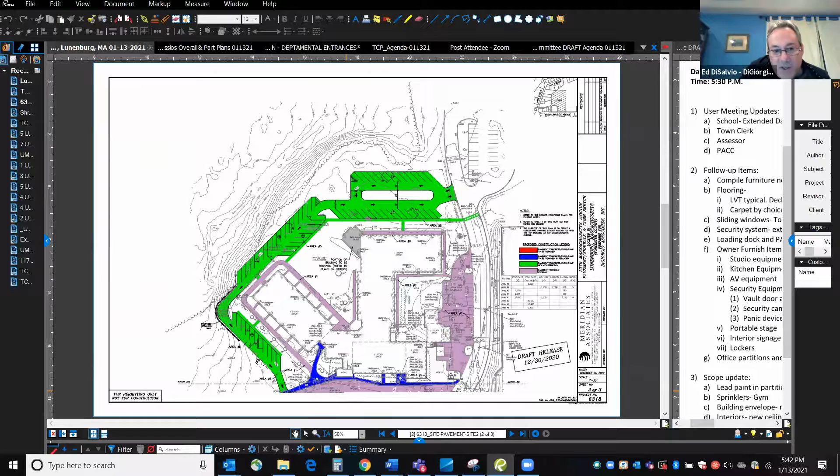So what's different from the previous version is that for the west wing, previously we were going to remove all that sidewalk because it was intended to remove all those existing exterior doors. Thompson had some additional meetings with the user groups and they'd like to keep those exterior doors as a second means of egress. So we've kept those walkways, and the purple color indicates we're doing a bit of pavement overlay over those existing walkways, as well as all the other walkways that are to remain. We're also doing an overlay on the east parking lot, which was brought up at the last meeting as well. We took a second look at the pavement in that east parking area and agree that it should be overlaid with a fresh course of pavement. So those are the major revisions.

The new parking is the same, the parking count's the same, none of that has changed. We've just updated the overlay areas. So that's on the civil site side. I don't know if there's any questions on that.

Yeah, okay, we'll take questions. I'll just go right down through, I'll start with Brian. Thank you. I like the sidewalk on the northeast for access for the kids from the middle and high school, I think that makes sense for that walkway. I did have a question. Did you consider kids coming from the middle and high school going to the Boys and Girls Club towards that southwest? I feel like they'd follow that crosswalk, continue west, and then would they get onto that purple, follow that down to the bottom? I didn't know if this should be a consideration for a crosswalk in that southwest corner. I just want to make sure that we don't have kids crossing traffic trying to get to the Boys and Girls Club down the street.

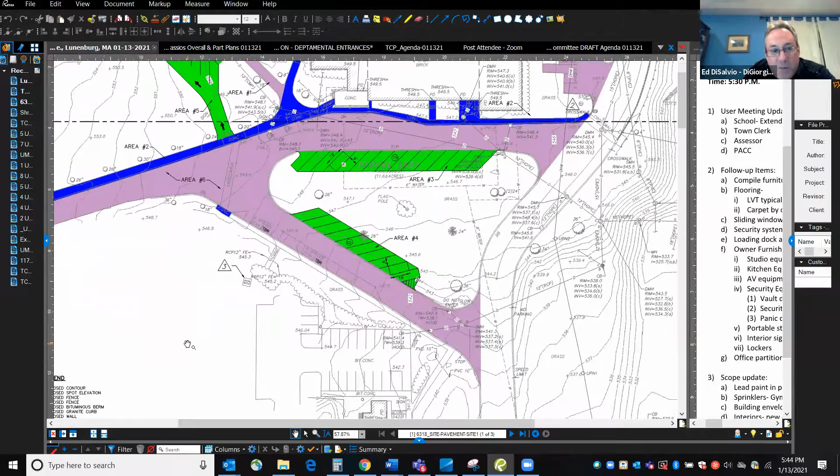I think it's the next drawing. Maybe, it went up. Yeah, right there. So there's a crosswalk at the end of the green where it intersects with the blue sidewalk and the purple pavement in the road. You can see there is a crosswalk there. It's kind of screened, but there's a crosswalk to go from the patios, right where Tom's showing it, to the side. Is that what you were referring to that you'd like to see?

So I'm referring to that area. I don't know if there should be a crosswalk going across the green, in that entryway to get into the parking lot, to go across that sidewalk. Does there need to be a crosswalk there? Yeah, going horizontally?

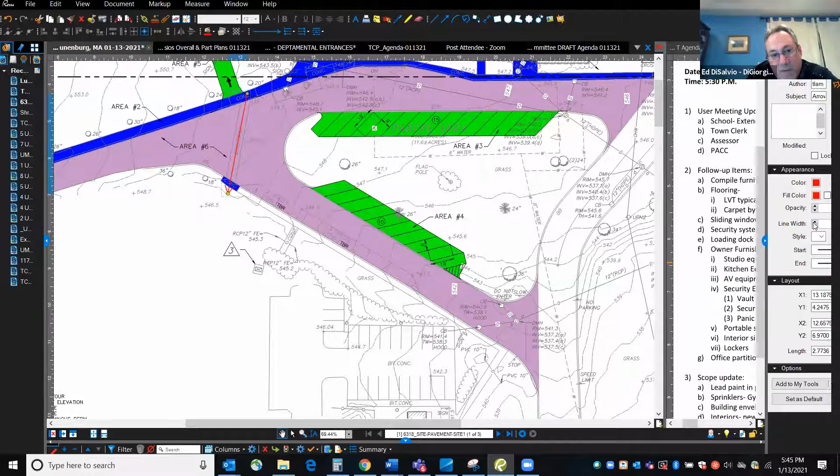Yeah, it's there because of the parking that's on that side. There's a walkway as you work your way back up towards that intersection. So then there's a crosswalk to either go to the TCP building, or when you're leaving it, to get to the parking that's around that island.

Is there another one? I think what he's talking about is across the end of the entrance to the road that heads around the west wing, because the kids will be walking up that new blue sidewalk towards the teen center. So off the north end of that existing crosswalk across the driveway, to the left in the picture.

Okay, maybe Tom, you can sketch that in so we can all see it. So we're saying around here, it's going to be across Area 5, the green of Area 5, where you have the blue that intersects the green. But if you go down lower, you have the sidewalk. If you go down towards the main turnaround, you have a sidewalk there. So there needs to be a crosswalk.

Bring it down more, bring it down more. Right there in that blue. In the blue, going across. So it should go like this. No, you had it right the first time. Horizontally, so it's parallel with the sidewalk. It just crosses the driveway. That's correct. Okay, we can definitely add that.

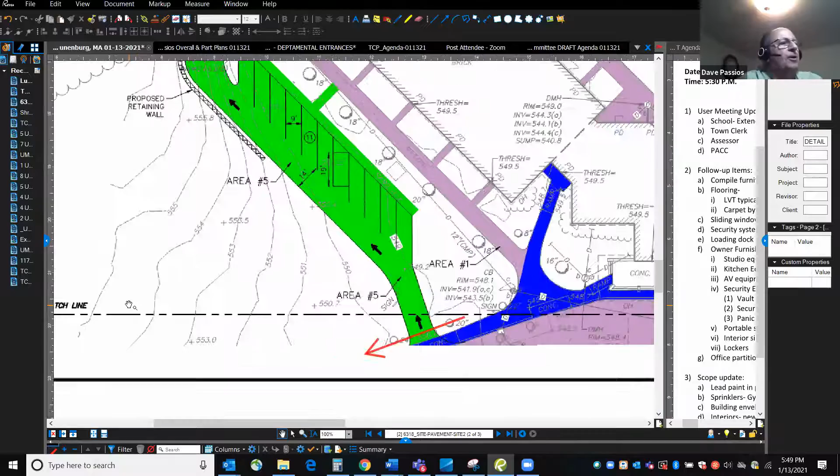Because there'll need to be a don't-disturb area -- that may be the wrong terminology. It's more conservation, but beyond that green area, there's going to be an area that's going to be dedicated to grading, and no impact on that wall, so on and so forth. Let me see if I can get that right.

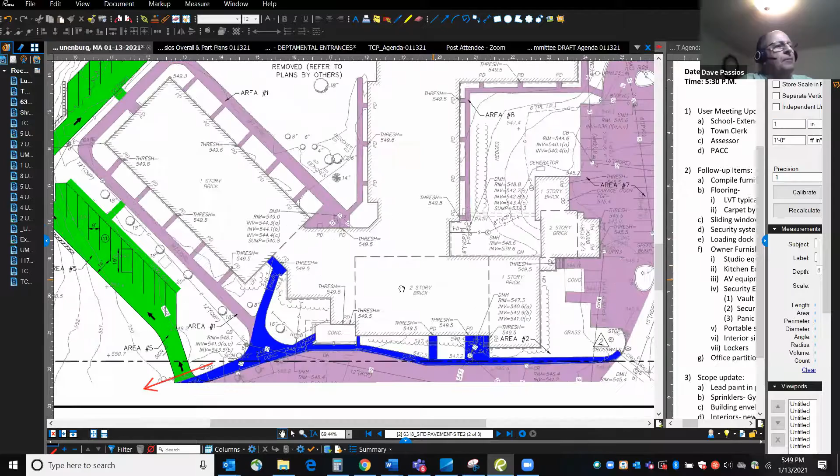I think he's driving at a limit of work there. We can establish a limit of work along that -- yeah, that's the terminology. Yeah, you're right. Okay, I mean, probably need to overlay grading on that, Ed, and see how that comes out. Anything else, Dave? Nope, I'll have them determine that and get back to you on it. We'll have them online, yeah. Okay, appreciate it.

Matt Allison. Yeah, the only thing I can think of that stands out to me is, I'm wondering -- you've got existing sidewalks, and then you're going to build a new sidewalk in front of the parking. Aside from the existing trees, which I'm not even sure the condition of, is there a reason not to bring the nose of the parking stalls right up to the existing walk, instead of building a second one?

That's a good question. Bring the brand new parking up closer to the trees? Well, basically what I'm talking about would eliminate those trees.

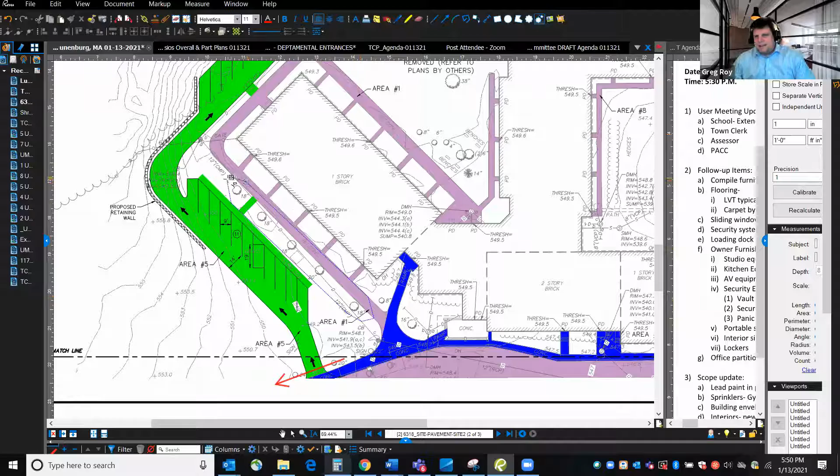I'm not sure what condition they're in. I think they've been there since I was in first grade. I think that's what the concern was, the trees. I looked at those the other day when I was walking by there. I think it's varied, Matt. There's a couple that are in pretty good shape still, and at least one that took a beating in one of the storms, an ice storm or something.

The other thing is I think it's laid out the way it is now because we had expressed in a previous meeting that we liked that strip of green space and the trees left in place. So I would disagree with extending the parking lot to that walkway, but that's just my personal feeling.

What about the other way around? If we're going to have to redo the walkway anyhow, just make the walkway next to the parking.

I'm still, my question is going to be on the doors, but I'll wait for my turn. I don't see a purpose that we have that many doors, that's an expensive thing to have all those doors for egress, you know?

Well, hang on one second. Let's just make sure Matt's done. I know, Matt, so I did, would you look at it, yeah.

Maybe moving the walkway to the other side of the trees. All right, hang on, bear with us. Well, I guess we're talking about that. I don't know if we want to take that up now or if we want to.

Does it make sense to talk about the doors and then we can back into the walkway? Sure, so I can have Matt explain. Did you have any other, that topic needs more discussion, but did you have anything else, Matt, that you wanted to ask?

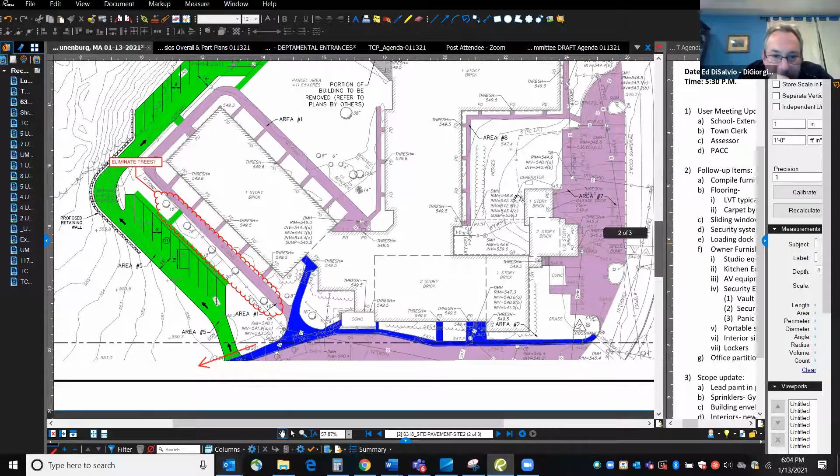So if there's no handicap spaces over there and you're not using it as an accessible route from a handicap space, I don't know that you would need a sidewalk technically. Customarily you do provide it, it's nice to have folks not have to walk across the grass to get to the building. You provide a courtesy walkway, so when you get out of your car you could walk across the head-in parking and then take the little green path over to the purple overlay to work your way to one of the building entrances.

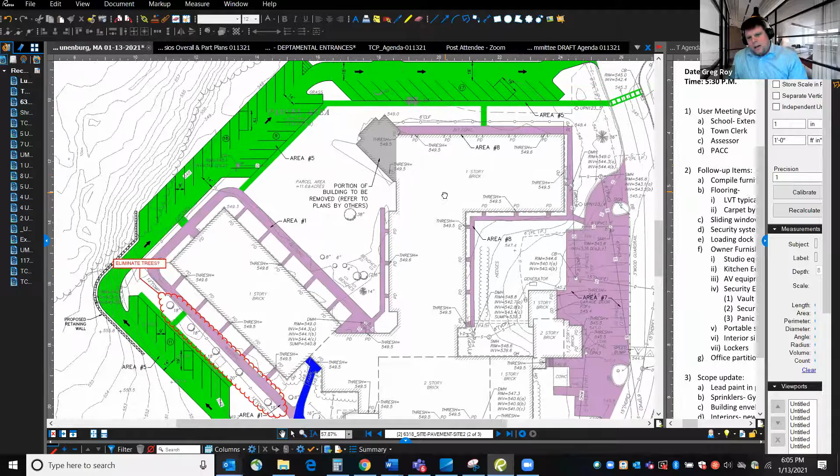It's a little different in this situation, like if you were to pan up to show the parking on the northerly side there. It's different when the parking is on the opposite side of the building, because people will walk naturally towards the building, so they're not going to naturally walk towards the sidewalk anyway. That's probably why they didn't show a sidewalk along that portion - no one's going to naturally walk that way. But when you have parking up against the building, typically it's included.

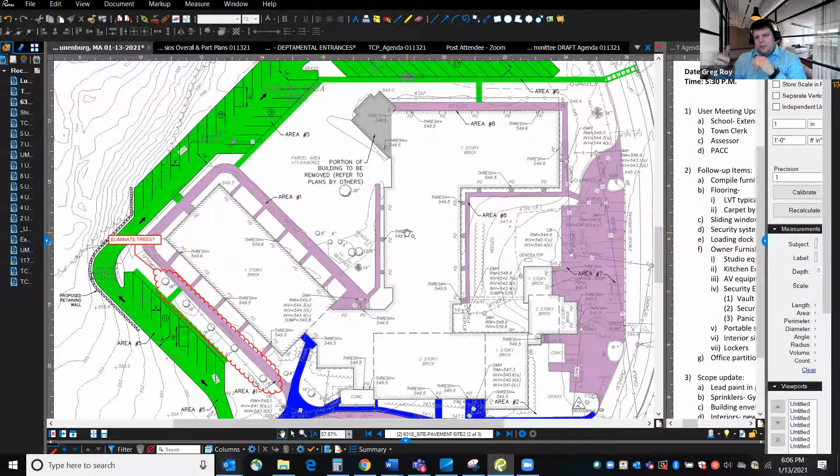So I guess I'm in favor of having it up adjacent. I just think that we need to eliminate the existing sidewalk longitudinally. We might need connections to the doors, but we'd want to eliminate the rest.

I get the feel that Ed really needs some direction on that. Otherwise, we're going to delay the final layout of this. Can we work this out amongst us tonight?

I honestly, if the committee agrees that we should take the trees out and move the parking lot closer, I'll get on board with that. My preference would be to eliminate the existing sidewalk parallel to the building and just extend narrower walkways, or whatever's required for ADA evacuation through those doors, to be able to get to the parking lot.

I think if we're going to keep the doors in the offices, then it makes more sense, in my opinion, to just bring the walkway right up to the building and then push the parking right up to it. So you have the doors, then a sidewalk right there, and then the parking lot. That saves us some maintenance area, and as Matt Allison mentioned, provides some expansion potential down the line.

I tend to agree with that. I think it also might save a little cost, because if you slide that closer to the building by 10 feet, you're going to be out of that slope where the road takes a 90-degree turn around the building. You'll minimize it—you're still gonna probably need a wall, but it might be smaller.

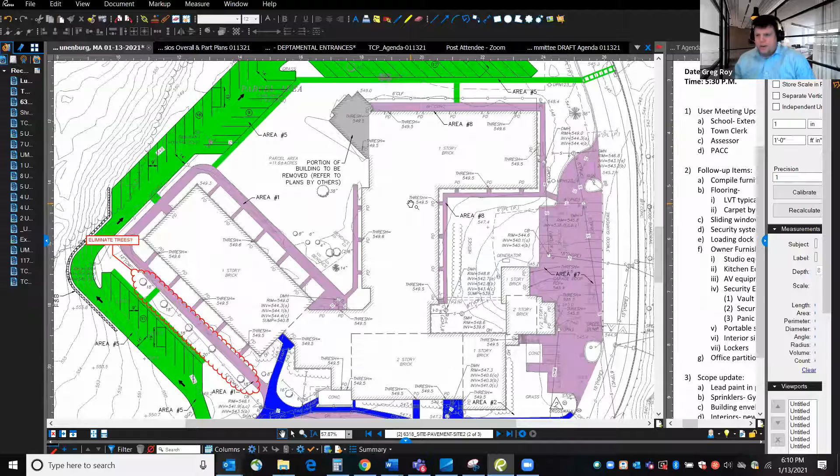Quick discussion—the other side of it is this sidewalk on the other side of the building, the administrative side. We talked about the side where we have all these doors and the sidewalk here. Can we pull that sidewalk against the building? If we're going to have doors there, why don't we just make it right against the building? That way we're eliminating all these little extra doodads and the higher maintenance. So I'd look at all of the sidewalk to be a walkway right against the building, as it is in the north section, area 8, where we have the sidewalk right against the building.

That turns into a reconstruction though, rather than just an overlay. I thought there's a cost associated with that. I thought they were going to make it concrete, but they were ripping it up anyhow. I think it's just an overlay, purple over the existing. All right, that's fine, it's like an inch and a half. If it's cost prohibitive, that's fine, I'm just trying to keep maintenance down.

I still don't understand the reason for all that sidewalk and all those doors, but I'm gonna keep my mouth shut. All right, well, we're certainly not censoring you, Dave. I felt that was the way to say it politically.

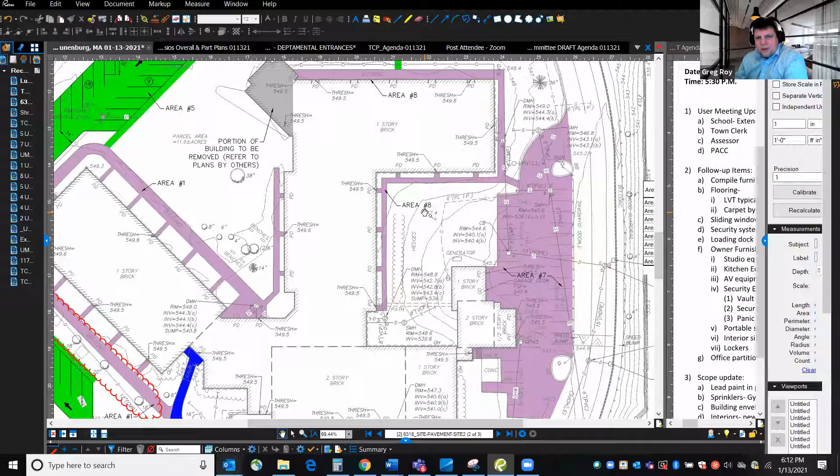Well, not against the building, but just to be clear, Dave Passios, basically we'd be keeping the sidewalk in the existing location and taking out the trees and moving the parking up against that location, correct? Right, which would eliminate the requirement for a new walkway to be constructed on the edge of the parking lot. Oh, okay, move the green up to the purple. Clear enough, gotcha.

With that, I will take a roll call vote. Brian Leighton, yes. Michael Ray, I want to ask another question.

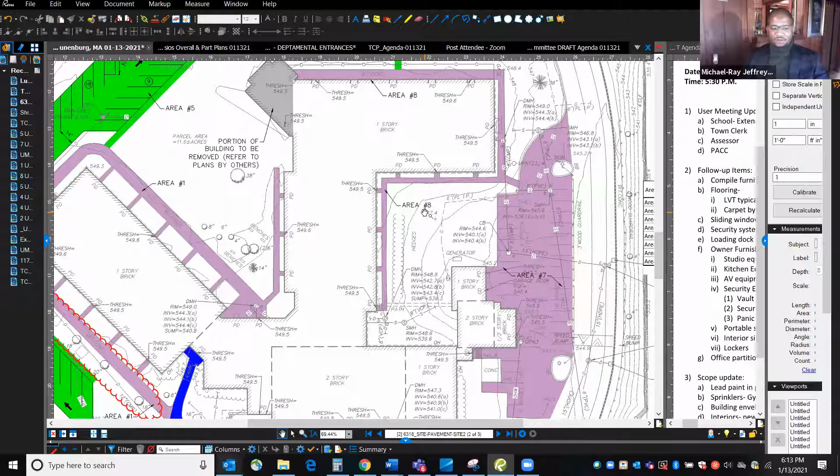I'm sorry, okay go ahead. So just so I'm clear, Mr. Passios, your motion is saying keeping these side entrance individual walkways that lead up to the main sidewalk, is that correct? And as Mr. Ray just mentioned, all you're motioning is to move the green to the purple, but you're not changing any of the purple, is that fair? Yes, that's correct. And if you're concerned about the connection from the door to the existing sidewalk, that's going to be required anyway if we've got emergency egress.

Okay, I'm a no. Dave Passios, yes. Matthew Allison, sure, yes, sorry. David Blatt, yes. Okay, yes for me. So we're 5-1.

Okay, does that give you what you need, Ed? Yes, thank you. Can I ask a question though, Mr. Chair? Yep. Michael Ray, was there a reason, is the reasoning more based on the fact of all the egresses and those walkways? Yes, okay.

I agree with you, but I didn't think that was part of our discussion there. No, I think it would just be more effective. On the north side of the building we're not really going to see that, but on the south side, this is the visible part of the building from the roadway. To me, it's a lot of sidewalks that go to nowhere, that are never going to really be used. It would be cleaner to, even though we keep everything else the same, just change this portion and eliminate those individual walkways, push the whole sidewalk up to the building, and push the parking lot up to the sidewalk. What that does though, Michael, is it brings all of your pedestrian traffic, which is coming from this parking lot, right outside the windows of all those offices along that entire wing.

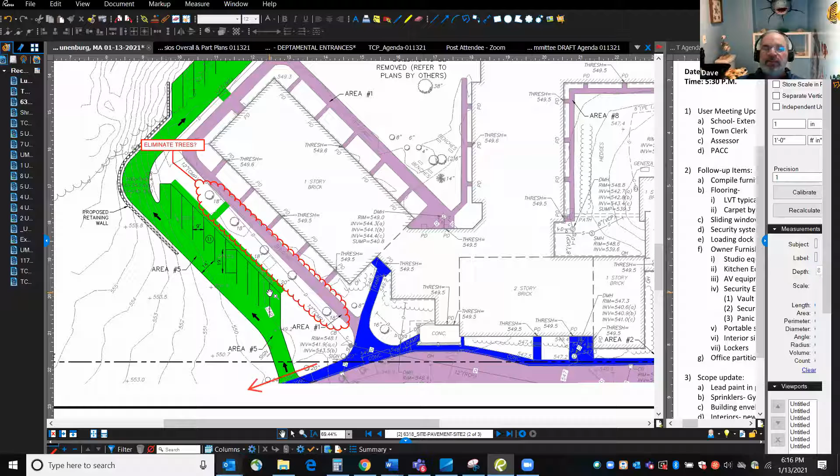Take the doors out? Well, even if you had the doors, could I do something else there? Could I have some kind of material that would look better, or not make it look like a walkway on each one? I don't want to make it so that anybody thinks they can go into the building that way, that's what I'm trying to get away from. Why don't we talk to the civil engineer, as Greg said a few minutes earlier, we might be able to do a pad instead of making a pathway. Perfect, let us know. We could always do an email vote or something like that if you needed us.

All right, Tom, why don't you circle back with the civil engineer, then get in touch with me and we'll see if there's something we need to do. Okay.

All right, so we'll move on. Ed, I don't know if you still had more to go. Yeah, just another quick update to the committee.

We have started the construction cost estimate. The different design disciplines have been providing drawings, sketches, and design narratives to our cost estimator. Tom and I had a couple of specialty meetings today with our design team and the cost estimator on the building envelope and the HVAC. So we're working hard on that cost estimate, pulling all the pieces together. It's a work in progress right now.

One of the questions I have that plays into the cost estimate - we're also doing the soft cost side in addition to the hard cost side, so you have the full picture. And one of the questions pertains to escalation.

We typically do the cost estimating based on today's dollars, but escalate that price to the midpoint of construction. So we were wondering if the committee has a general idea, knowing you're going to town meeting in spring, assuming it gets approved, when you think the design phase would start. From there, we can build a design schedule and a construction schedule to figure out that midpoint of construction date, because we've got to add that escalation cost to the construction cost to give you a good number.

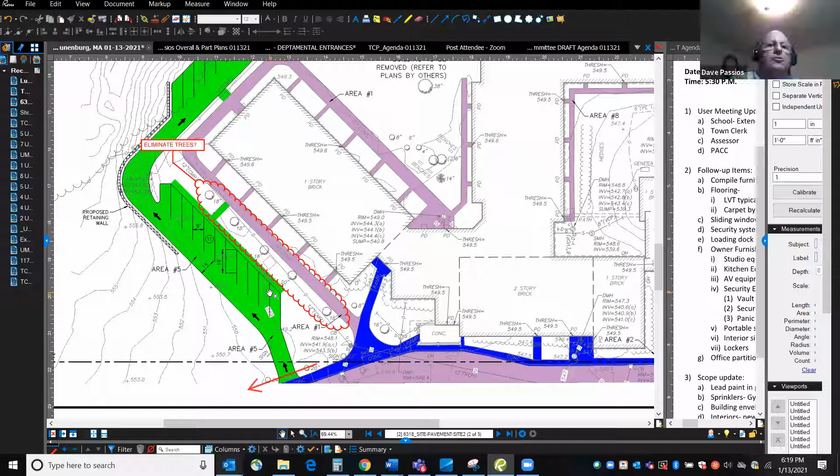I guess I would think it would be pretty quick after receiving authorization from town meeting, but I'm backing off on that a little bit. I'm not sure - Greg, assuming we're going to need to go through the election process, the ballot process also, that's another two weeks. And then that funding is available after July 1st, no earlier.

Right, good point. And then, I don't want to be sensitive here, but I think we'd have to rebid this, correct? Technically, or no? Heather, do you have any input on that?

Can you ask the entire question again? So if it was approved at town meeting - approved at town meeting to build the project - that cost would include bid document preparation, soft costs. How does that work? As far as putting it out to bid, do we have to put that out to bid again, or how does that work for the design preparation services for the bid docs?

No, I think we could do a continuation of the current contract. Okay, so obviously that's ideal because we got to confirm here - I'm not trying to be difficult, I just wasn't sure. So assuming that was the case, I would think we'd be starting pretty fast, as soon as we could negotiate a contract. July of this year - it doesn't have to be perfect. If you said August, we'd be starting design, as a start that's fine.

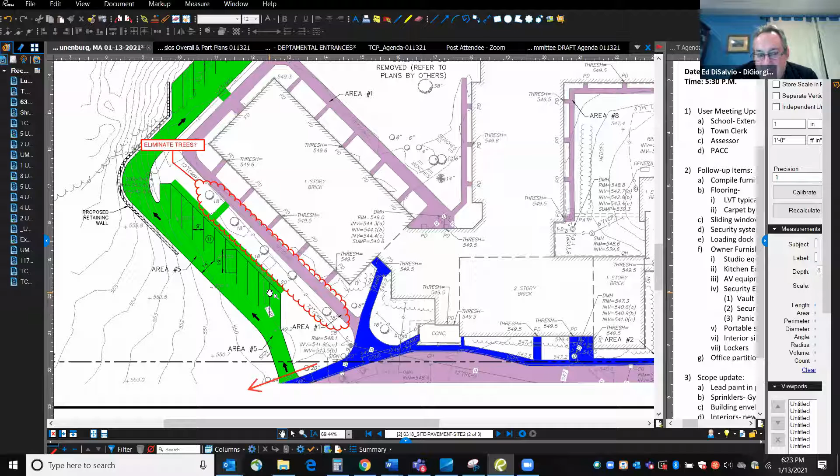Tom asked about the escalation. Based on a design start of August 1st, will it be reasonable to say the midpoint of construction is somewhere mid-year 2022 for calculation purposes? I think construction will be 12 months all in for the duration. We've got maybe 4 months for the bid documents and design, then bidding will be 6 weeks - 4 weeks to file sub bids, then 2 weeks to open the GC bids. Then maybe a month for the town to negotiate the contract with the contractor, so there's some time in there we need to build in. I think we can figure that out, Tom.

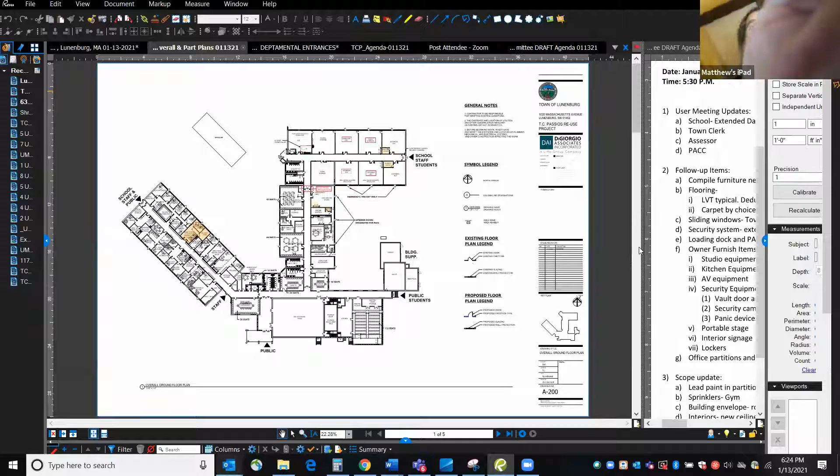I just want to quickly go over the status of some of the user group meetings, and then there's a list of items I'd like to discuss with the committee, which does include the loading dock issue.

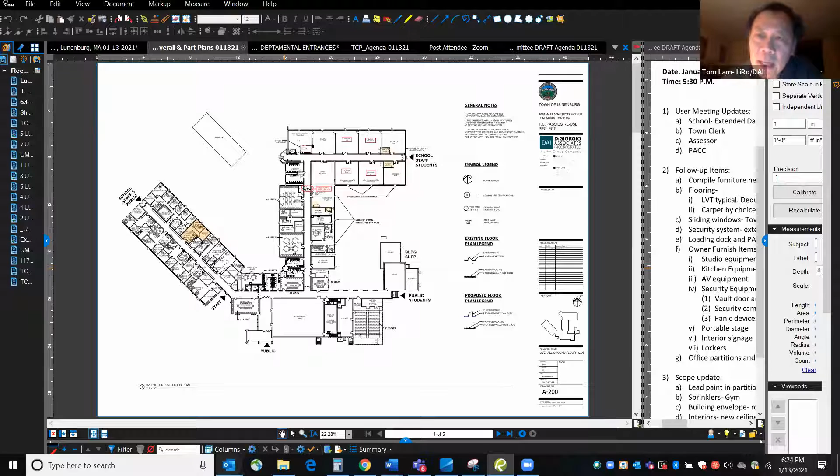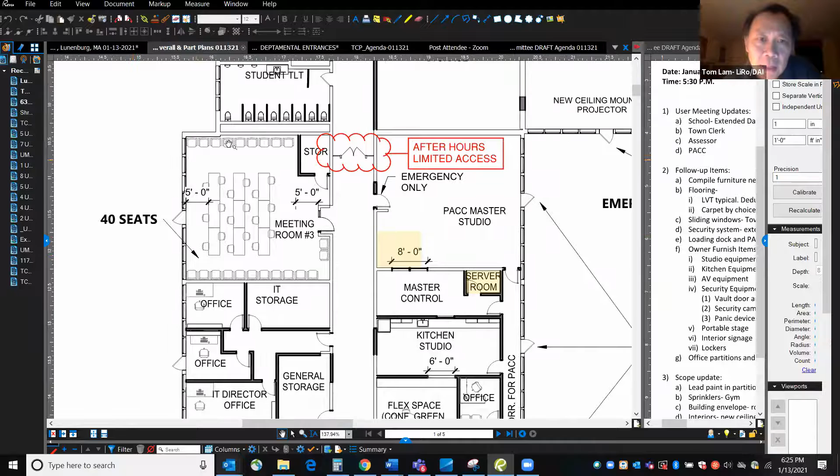Since our last meeting, we've met with the school again because we didn't talk about the extended day area. We eventually met with the town clerk. We're still trying to get hold of the assessor, so we haven't had any feedback from them yet. Steve and Joe have been very kind and gave us several rounds of feedback, so I'll quickly go over some of the very minor changes with the last few groups.

From the school standpoint, the fine tuning is: last time we showed a couple of offices in the ACE area, but since they're more general purpose offices, it would be better to move the director's and nurse's office closer to the door where students come in. For the ACE program, they also want to add some sort of kitchen with a stove, so we need to talk to our engineer about that. We want to define this kitchen and washer-dryer area, so we're going to change the floor coloring to make it look different.

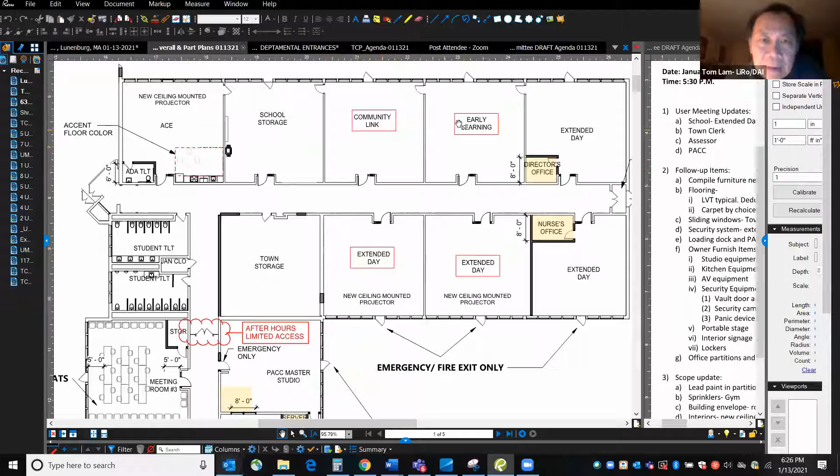The other two changes are really to swap the location of the extended day with Community Link. Community Link and early learning used to be on this side, but they felt it's better to be on the other side. Cost-wise, it's not going to make any difference.

Regarding the PACC area, Steve felt it's not necessary to have another interview studio, so we're making the master studio bigger. We are creating a server room here that used to be another function.

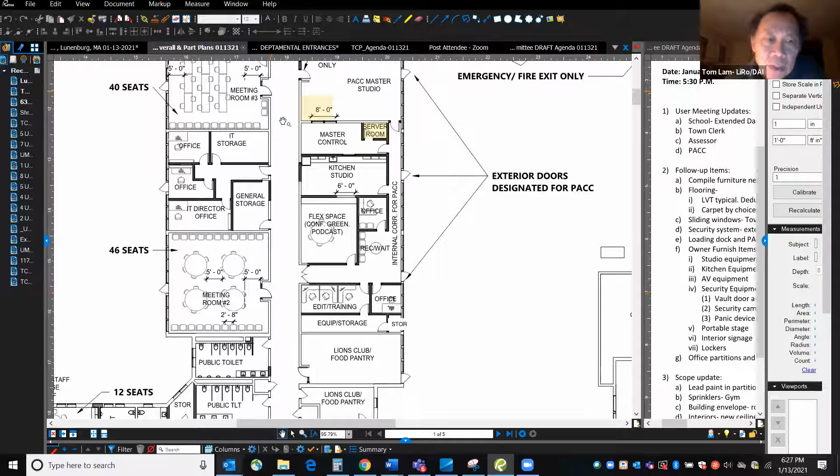One of the things Steve brought up was that the PACC area would be open after hours, so he wants to make sure there's security - that people coming from the PACC suite, when they need to go to the bathroom, won't have access to the conference rooms or other parts of the building. That's why we put in after-hours limited access.

Another issue that was brought up, which Steve mentioned earlier, is that there's some very expensive equipment that needs to be stored or transferred into the building, so there's the whole discussion of the loading dock. I wonder if this is an appropriate time to bring up the loading dock issue.

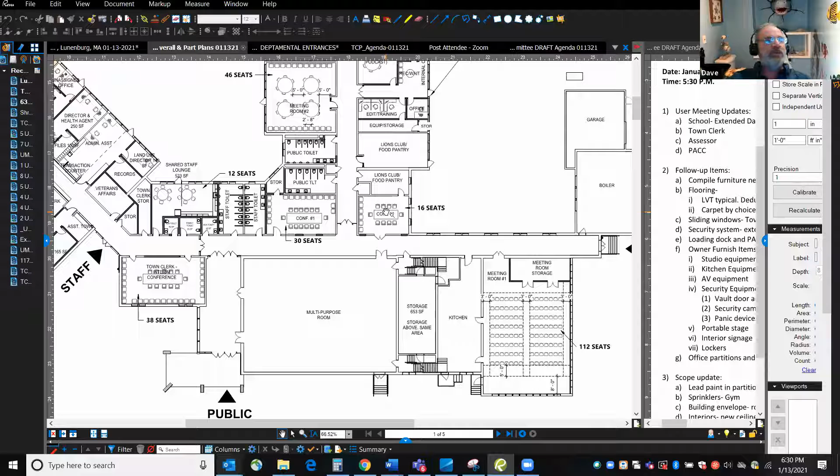Mr. Chair, that was actually one of my concerns too, because if you close off that corridor, there are no public bathrooms left if you're using the multi-purpose room. I see what you're saying. So I'd rather see the family toilet moved to one of the ADA toilets, and the ADA toilets, being next to each other, could be staff bathrooms as well.

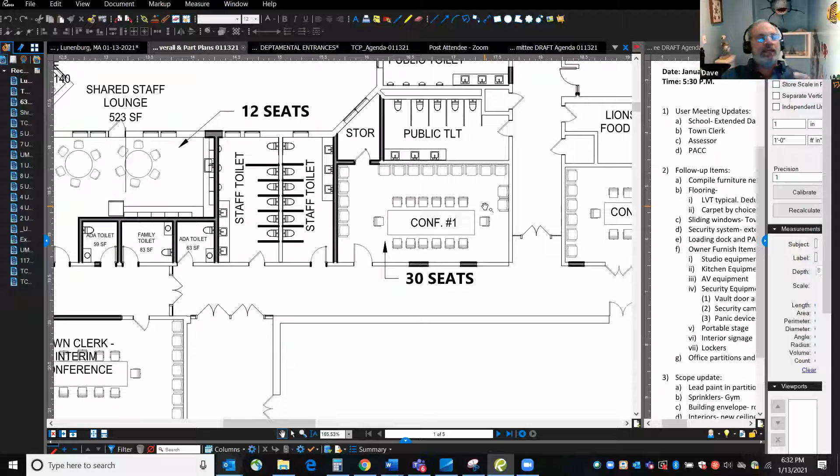So Tom, my biggest thing is I don't want to—you have the PACC, you have all these things down that corridor. So if I'm having an event at the multi-purpose room, or if somebody's using the gym, do I want them going down that corridor, or would I rather they go to the staff toilets? But if they're labeled staff toilets, it's kind of saying you can't use this if you're public.

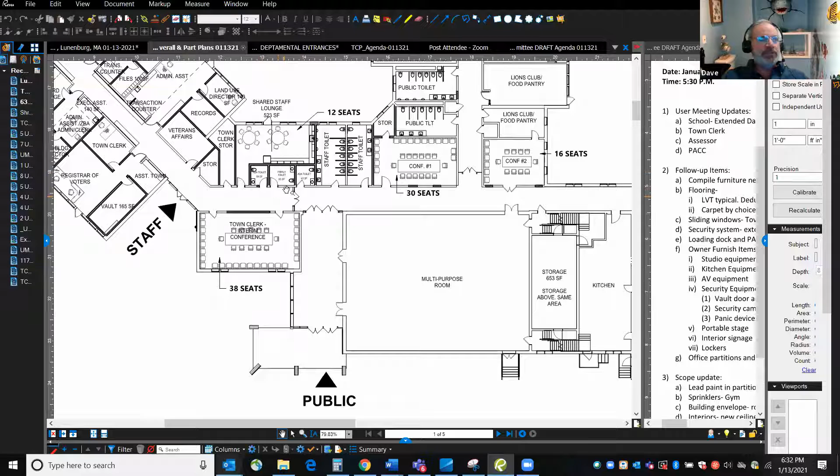So that's why I'd like to see, and this is just my opinion, that you take the right ADA toilet and the family toilet and switch those. This way the family toilet is still a family or handicap toilet, and then you have two toilets there that could be ADA or staff toilets if they didn't want to go to the main toilet. Because I can't see staff needing more—right now staff has one toilet for the whole building, pretty much. Well, I should say two toilets, one in each building.

So what if that's an easy change between family and ADA? What if we say the two ADA toilets are staff toilets, and we just say this is public? During the day, the staff will probably use the two toilets in this area. Right, exactly. And if they're occupied, they can risk going in and being with the public, if it's occupied—which hopefully there won't be too much. During the day, to your point, Dave, that's probably pretty low risk, right? Exactly. So that was the thing, I'm trying to make this so the building could be secure at night, depending on the events going on.

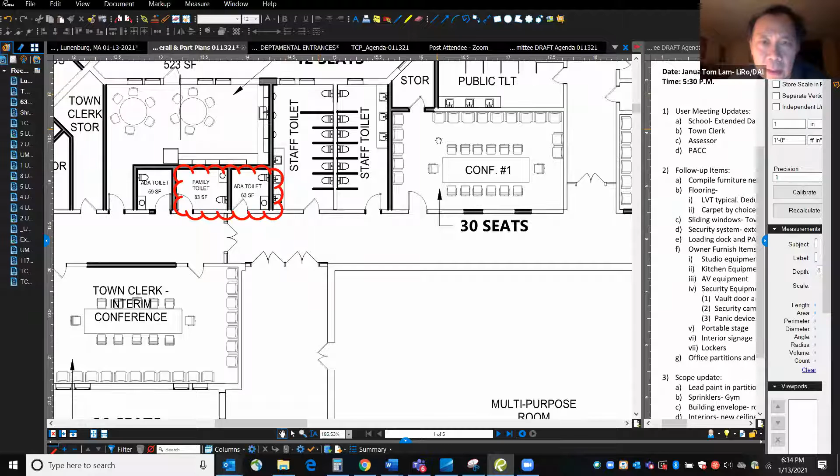Anybody else have any comment one way or the other on that? Tom, based on the way the partitions are set up, are those two toilets farthest in that room accessible toilets? Is that why that partition spacing is different? Yeah, so all these

Group toilets are accessible. Okay, we were just trying to add some more individual unisex toilets, that's all, because actually we didn't have enough, our counts didn't quite work. So that's one of the reasons why we added some, and then there was a request for a family toilet. So could you, even if they're labeled ADA, I don't know if you have to label it ADA, but if the two toilets are sitting there and then you have the family toilet there, that one, I guess would that solve it, or does it have to be labeled ADA?

Oh, it's more general information. Perfect, okay perfect. Yep, and I think there would be, when it's time to put a sign for this room, there'll be a wheelchair symbol or something, because it is accessible. All the toilets are accessible. Right. Okay. Okay, Matthew. Yes, excuse me.

I know I've missed a few meetings and I've fallen a little behind, but I don't understand why, first of all, I don't see why you have to have two separate ADA toilets, and I don't understand why you can't have an ADA toilet in the men's room and the women's room. And the third thing is, why are we labeling these bathroom facilities? Why isn't it just men and women? I don't understand why you have to separate staff from public.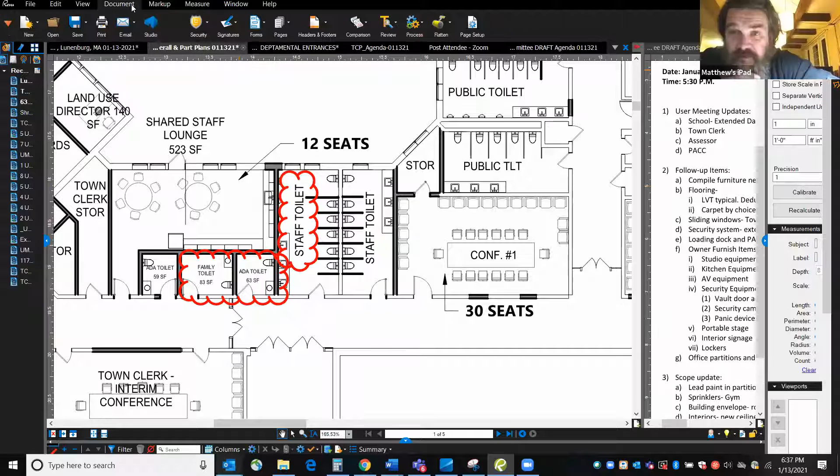So they asked that there be a toilet, that they have a facility that's separate from the public facility. Okay, so they're going from one toilet to twelve toilets. So that's why my suggestion is flipping the two toilets and giving them, okay, you have two toilets for staff, and that's it, you're done, I guess. Well, go ahead, I'm sorry.

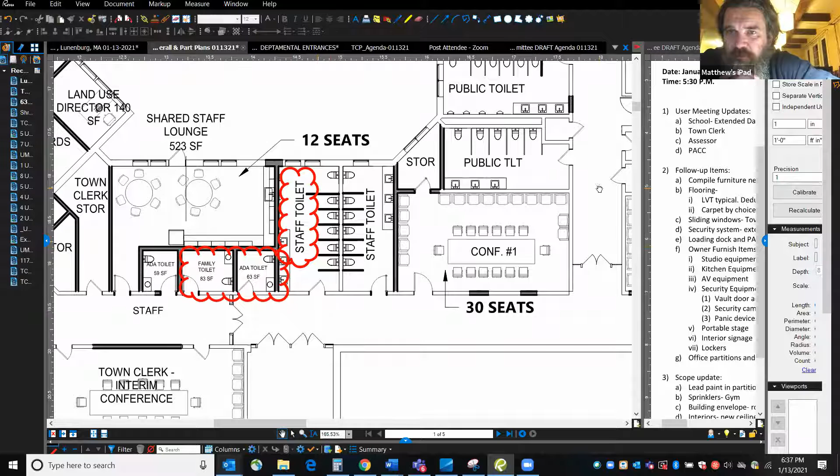No, go ahead. So the follow-up to that comment was, what about if there's a big function in the evening in the cafeteria? Is there going to be any place for those people to use the bathroom? So it would be, if it's labeled staff, possibly they would have to go down the hall and you'd have to have that hallway open. If it's not labeled staff, they can go right there.

Well, in all honesty, I don't care what the label says. If I gotta go, I'm gonna use it. That's right, exactly. Everybody on this call is going to feel the same way, right?

So I guess my biggest point here is that there's a big function facility at the end of the corridor. I guess it doesn't make a whole lot of difference how far you have to walk, but it doesn't seem like you're going to need to draw somebody a map to get there from the cafeteria.

I think I would rather support that the two smaller bathrooms be labeled staff bathrooms, and that large bathroom that's labeled staff now, just make it a public bathroom. Just label it men, ladies, gentlemen, however you're going to label them. Same as the set in the central hallway, or the hallway headed back towards PACC. Both of those areas be labeled the same.

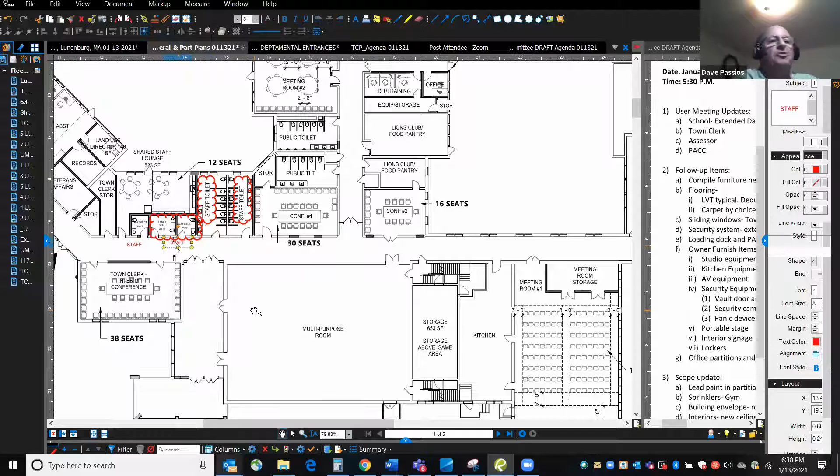To address Matthew's last point about location, I think that's where they are now, so they're trying to just not reinvent the wheel with the plumbing. Do you have any comment on that, Tom? Is that exactly it? We want to reuse, even though all the fixtures would be new, but we want to keep.

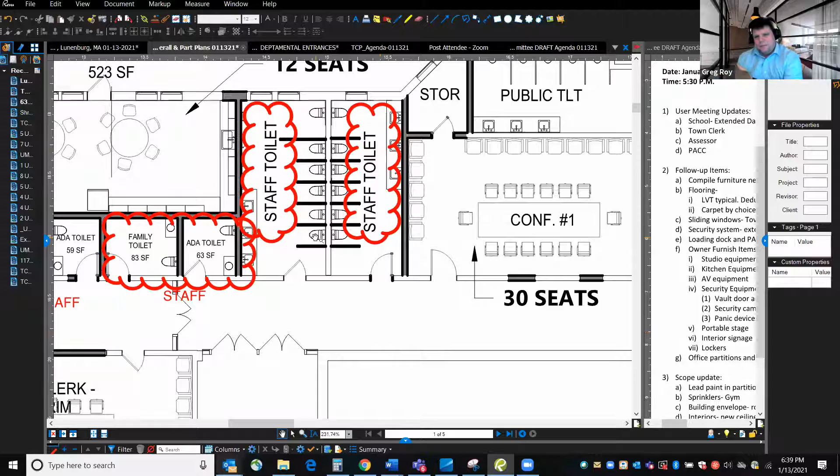Yeah, but do you have any insight as to, I mean obviously if we're building a new building it might be different, but in terms of length of travel, how does that, having to walk from the big meeting room in the cafeteria, meeting room 1, out the door, down the hall, how does that length compare in the realm of projects you've worked on, say? Is this a long distance?

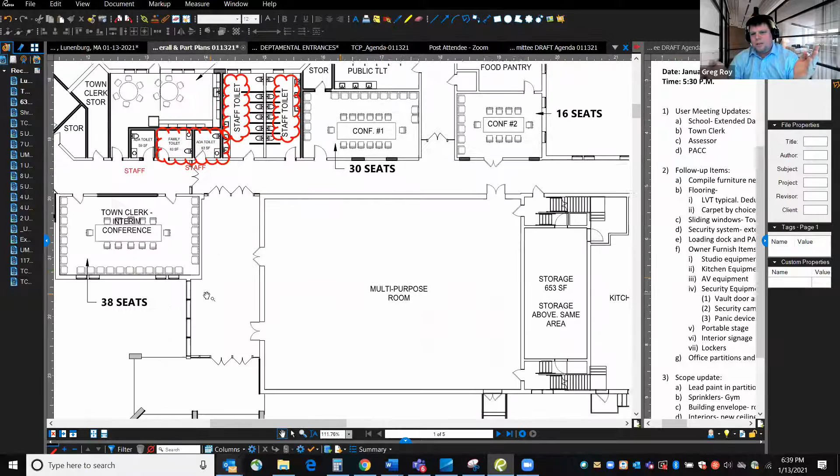Let me double check the scale and see how far it is. I'm just checking the scale so I can measure properly. Oh, as indicated, that's not helping me. 16th inch.

Okay, so the distance between meeting room 1 and here is 112 feet, which is not unreasonable. I believe the plumbing code is talking about 500 feet. This is crazy, but if I have to go, I'll go the other way.

All right, so we're in the realm. I guess it's less than Fenway Park, but not quite as much as Sullivan Stadium, huh?

So I guess to clarify, my question is I'm not so concerned about the distance. But if those are staff and they're not usable for public in the PACC hallway, are those double doors going to be locked in the evening?

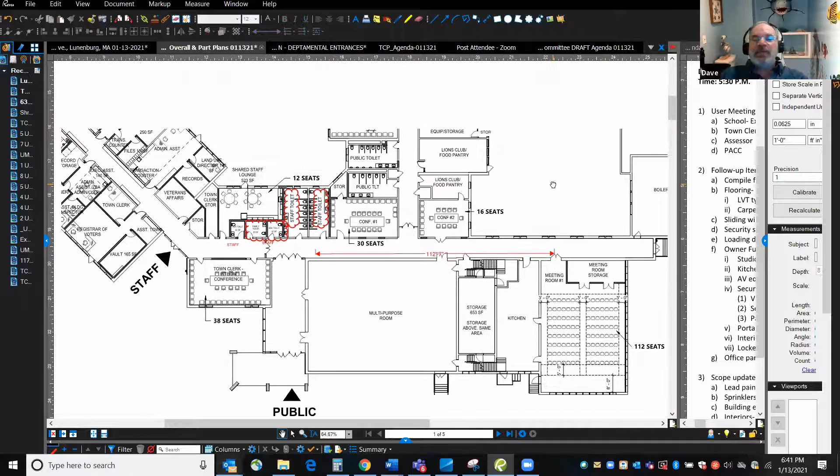The idea, Matthew, is that would be an option. So if they felt it was a function, like if it was just say maybe kids, you might want to have them closed so that they don't go down the hallway. But you could always have them open if you wanted.

I think we're all saying the same thing. I think we want to take those two bathrooms that are currently labeled staff bathrooms, not label them staff bathrooms, just label them bathrooms. And then if we're going to label anything staff bathrooms, it would be the two single bathrooms that are just inside the doors going to the administrative wing.

Yes, I agree, I think we're all saying the same thing. That's what you're saying, right, Dave? That is correct, yes, sir.

And I would question whether you'd have to label even those as staff bathrooms. If you have those doors right there, you can block that off and people could still use them if they need to. They shouldn't be there.

And I mean, we're probably splitting hairs here, fellas. If a year from now they want to label it something different, that's not a very expensive change. True, I don't know, we might. Will make the change for you for free. How's that, next year? All right.

Well, all I'm saying is you're talking about a little sign right on the door. It's not that big a deal. It might have to go to town vote for all we know, but that's okay. Well, I don't know about that, but anyway, I think we're on the same page.

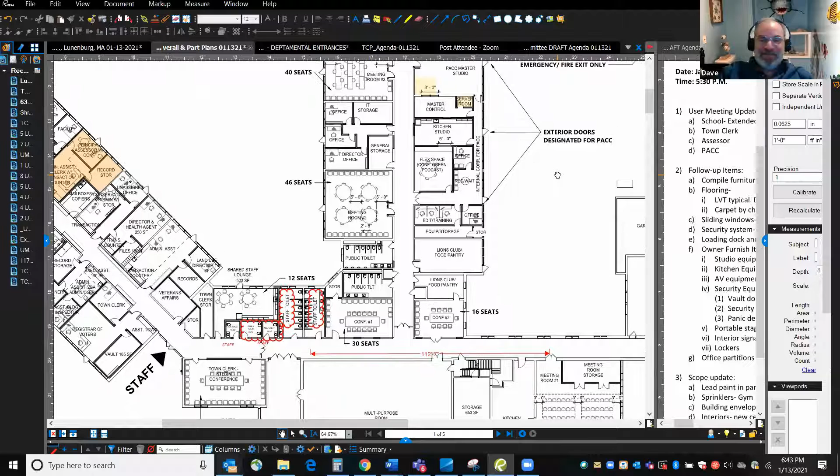No problem, okay. So should we go back to PACC? Yeah, sure. So the next question then is about the loading dock. Yeah, I have lots of questions on this.

Is Steve still on the call? Maybe I'm getting, I don't want to cut you off, Tom. I'm sorry. Oh, so I mean, it's a general discussion with the committee. Is there a need for a loading dock? Yeah, my biggest question, yeah, see, I don't know.

My biggest question is what are we going to, what do we expect to have delivered and to what frequency such that we'd require a loading dock? And I guess I'm happy to invite Steve to give us a little more commentary on that if Mr. Walker has something to add. Go ahead, Steve. Thank you, appreciate that.

PACC doesn't need a dedicated loading dock. The concern was when we started talking about two things. One was first moving into the building, building out all the equipment that PACC needs, especially lighting frameworks and a whole bunch of things like that.

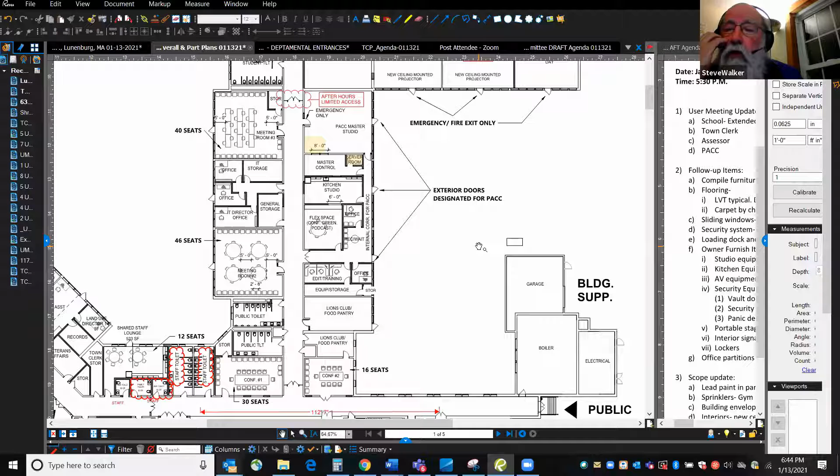But then we realized that in the normal operation of the building, you are likely to need somewhere where you can have deliveries. You have a cafeteria in there. You have public space that may need these things delivered. And the last thing we want is that somebody kindly gives us a loading dock, and then one day they say, you know, we have 3 truckloads of stuff coming in for a special event.

We need to wheel it all through your studio. So the thought was to raise it with this committee and abide by whatever you think makes the most sense. If there isn't a loading dock, then at the time of the major move, when everybody comes in, we'll be using all the corridors, all the doors. When I say we, I mean all the occupants of the building. It's going to be chaos for a while. And as you just referenced, I don't know what the regular traffic would need to be through a loading dock. So we're just raising it.

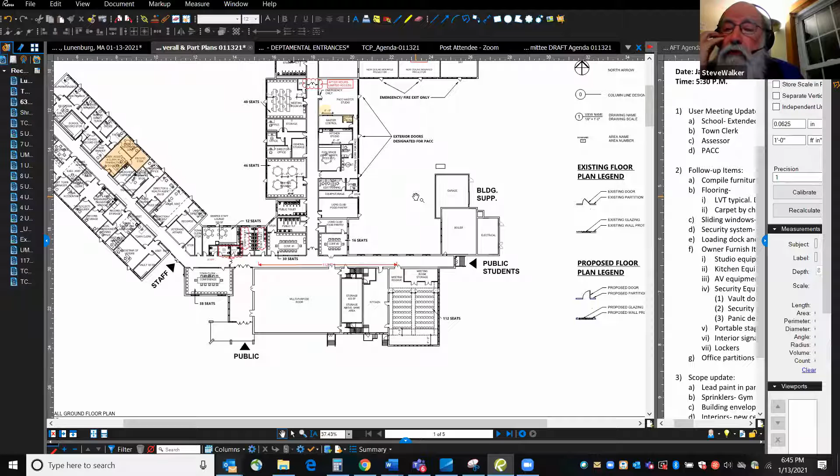Yeah, all right. I appreciate that, Steve. In my view, I think that loading docks are expensive, I'll just preface with that. I've designed some, there's a whole host of logistical issues, particularly on this building, where I can't envision a spot where we'd have the grading that would allow for a nice, smooth transition where we wouldn't have to create a ramp. And then you have all kinds of drainage issues and issues moving snow. And if we're doing it for a pretty infrequent thing, it seems to me that it might not be warranted in this situation.

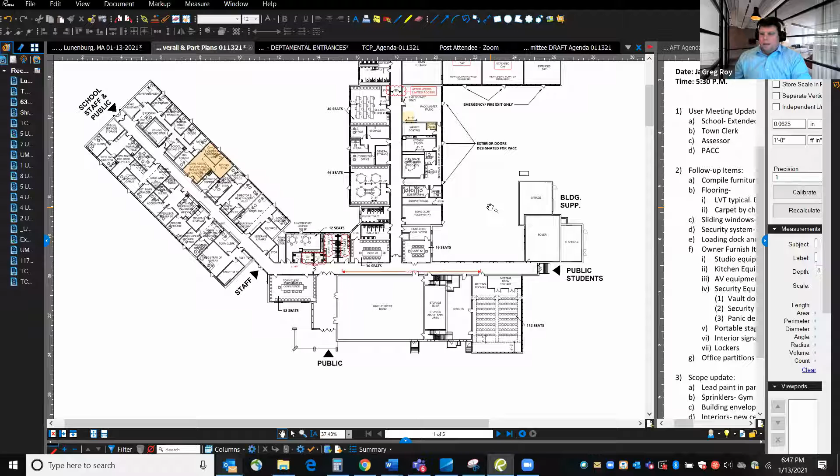But we have it for the high school, a loading dock, because they're getting food deliveries, trash removal, all that stuff. But I'm not sure with the frequencies we're thinking about doing food service and that kind of thing here that we'd rise to that level, but I'm certainly open to comments. So with that, I'll open it up. Brian, go ahead. Yeah, I would agree with you, Mr. Roy, that we're not going to have that regular delivery, so I don't think it makes sense to add that at this time.

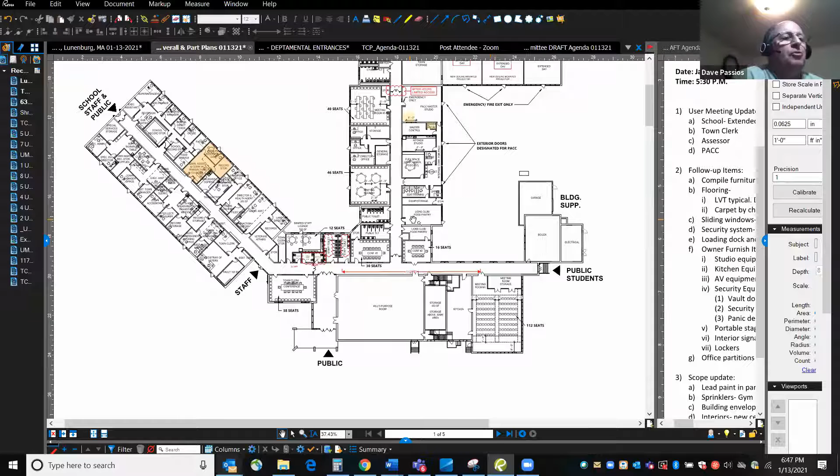Okay, anybody else? Yeah, Greg, my recollection over the years, thinking back many, many years, was that entrance near the boiler room that says public and student entrance, that was used quite often if there was something that you didn't want to drop down to street level and needed to get into the building. You backed the truck up to that set of stairs and laid out a ramp to the landing at those doors, and you rolled it in that way. That isn't something you want to do on a regular basis, but for moving into the building and special purposes of receiving, that was the way things were brought in.

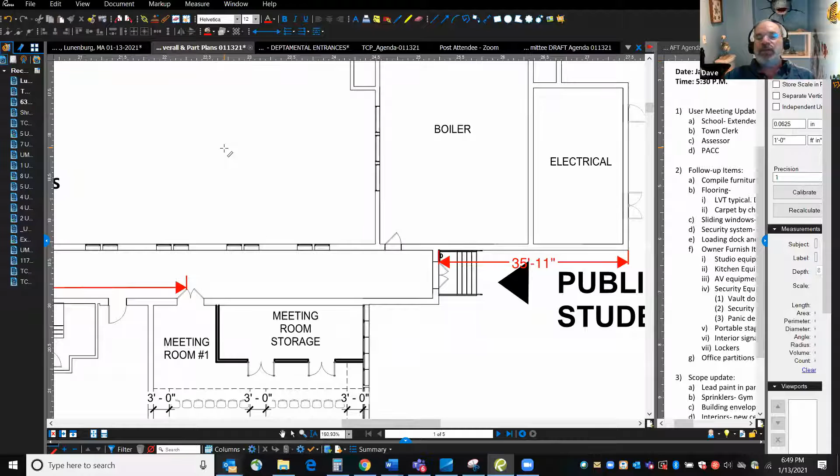I appreciate it. Dave Blatt, did you have -- yeah, so what about the thought of that same spot, instead of having stairs there, making that a ramp, a handicap accessible ramp? So if you want to move things in, you have a ramp to move things in. However, as well, we now make it part of the handicap accessible route for people visiting the building. So if we look at the meeting rooms being there, most of the public spaces would be through that door. And if we did a ramp, because you have all that room as you get towards the electrical room, you have 36 feet -- could we do that? And that would be used as a loading area then?

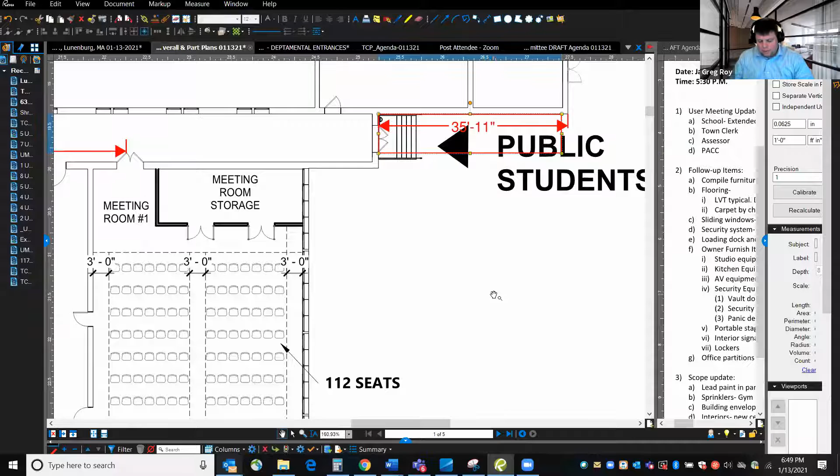Greg, is that enough to get the pitch that's required? So I was just going to do the rough math. I don't want to do people's jobs for them, so don't take this the wrong way, but this is really quick. You need for a ramp, it's 1 on 12, so you need 12 horizontal feet for every vertical foot. So let's see, you're talking about 32 feet, but then you need a landing. So you're talking about 32 and a half feet of ramp.

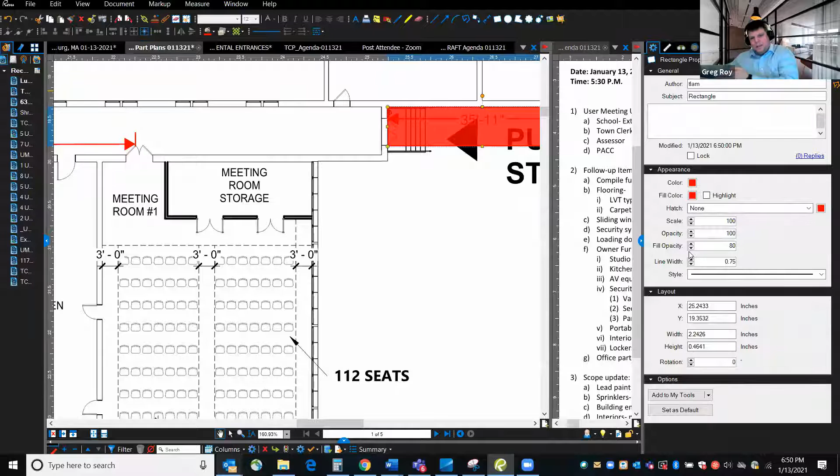And then for every -- you can't just go straight down, you have to do ramp, landing, ramp, and I can't remember what the... Understand, so it was just a thought. It might be a good thought, because you're incorporating two things at once, and we have more room than the 36 feet because you have the road there. Yeah, you have a ways till you get to the pavement, probably another 10 feet before the pavement at that point. So it's just a thought, if you can do it there, maybe it solves an issue of handicap accessibility in that area as well for the building.

Okay, not to cut you off, but I'll call on Matthew. Go ahead. Yeah, if we could pan up to the southerly face between the kitchen and the cafeteria.

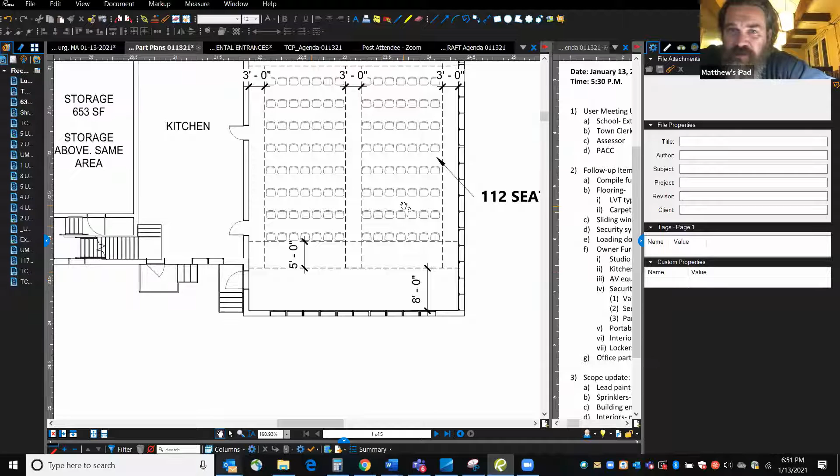There's 2 egresses there, and it's not like this is a warehouse that's going to be used every day. I don't know if it has to meet certain standards - it probably does - but this is a multi-function municipal building, and it would be nice to have the ability to use it. If it could go there, those 2 landings could be modified and combined and accessed when needed. I don't know, do we need a dedicated ramp, like a vehicle ramp? I don't know what the requirements are, honestly, but that seems like it would be an ideal spot, because the majority of things that need to be pushed in and out - the gymnasium and the cafeteria - there's double door access throughout the building from that area. Just my 2 cents.

It's interesting. I mean, if you're going to have... I don't know, you're saying doing something like what Dave just suggested in that location? Matt, like doing a ramp in there to try to get it.

Well, I guess it could work. If those 2 concrete pads - and I'm going by memory, I believe they're raised pads with stairways up to the egress - if you combined those and made one landing and one set of stairs, then you could have an area that you could back a truck up to. And forgive my farm attitude, but I don't see that it needs to be all that fancy. It's not a warehouse, it'll be used a few times a year, maybe.

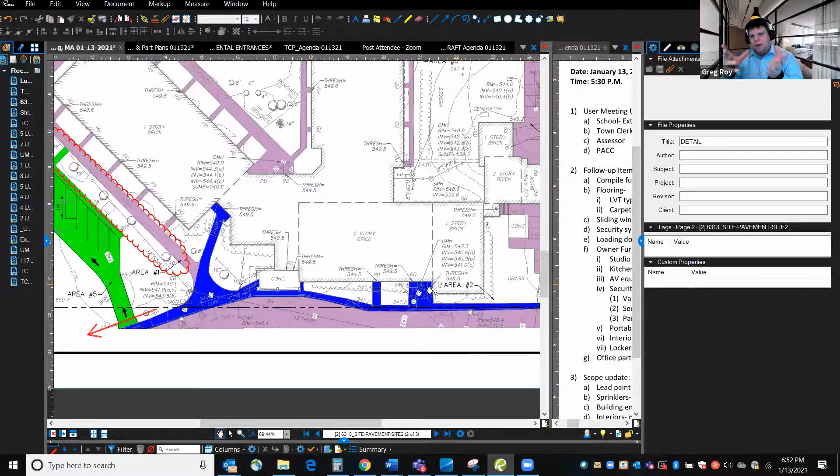I kind of agree with that. We have to see, because you might have to put a flush curb on the sidewalk there, Matt, so that you could get a truck up and over, because I think there's a sidewalk adjacent to the pavement there. But you might have to do that anyway, because if you got a landing coming out there, you probably want it dropped down for handicapped accessibility onto the pavement anyway. So if that's the case, maybe you could make that wider so you could back up a small box truck. You're not gonna get a tractor trailer there, but you could get a small box truck, for delivery of a piece of equipment that might not come on a huge truck.

So now it's an idea - a good idea. Nothing formal, but to Matt's point, it just gives us options and maybe makes it a little bit more usable as well.

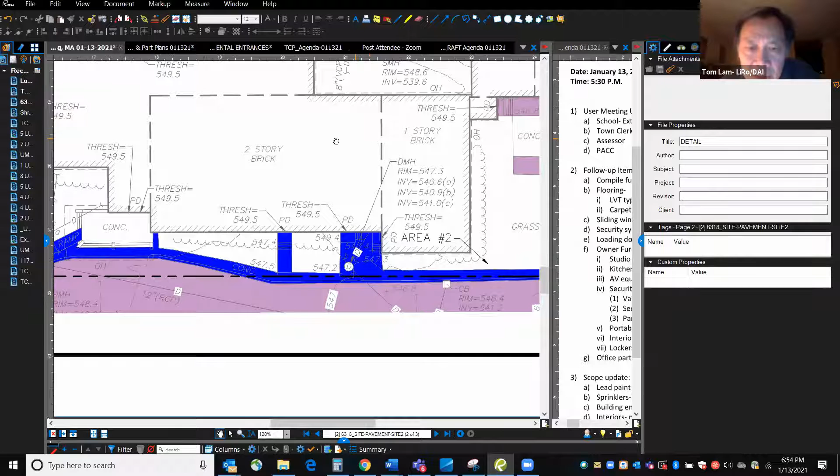So I was just looking back at the site plan, looking at the grade change. It looks like the finished elevation, the threshold, is 549.5, and the curb area is about 547.2. So that's about 2.5 feet of rise. That would be about 24 plus 6, so it's about 30 feet of run plus the landing. So we would need about 36 to 40 feet of structure to put it in front in this area. We can take a quick look to see what it looks like.

Will a 4-foot wide ramp be wide enough if you're talking about carts? We probably need like 5 or 6 feet wide if that's what we need to accommodate. The other thing, I think, is if you do that, then you're going to be changing the door on the corner of meeting room 1. And I don't think the expense is worth it.

You're talking about a ramp that, just so everybody understands, would not come straight out from the door. Likely it would have to be like a switchback - you'd have the landing, and then you'd go parallel to the side, ramp down, have another landing, and ramp down again. You'd kind of switch back to get that ramp to work because of the amount of length you need. So if you needed it there due to code, you'd probably do it, but truthfully it's probably not going to be that convenient to use that kind of a ramp for delivery. And plus, it's probably in the front of the building.

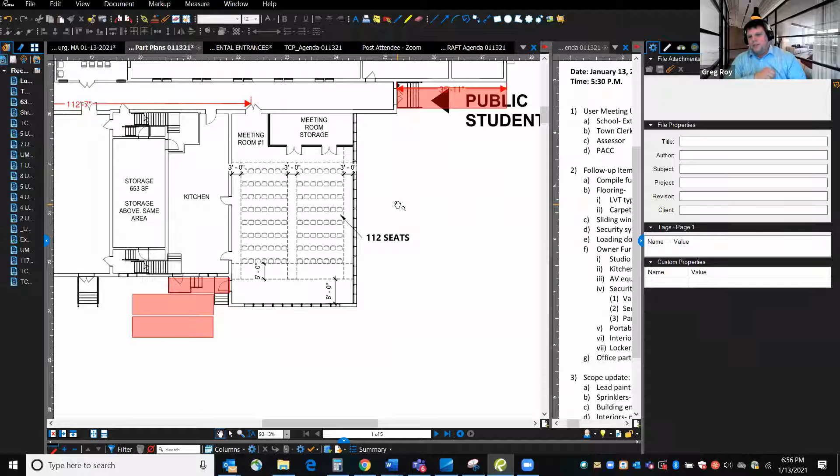Yeah, and it's in the front of the building. But even if we're talking about finding a way to do that on the other side, at the first entrance we were talking about, I just think the movers are going to probably, if it were me, I'd be like, why don't we just drive the truck around the front, drop it on the sidewalk, and roll it into the front door? That's probably what they're going to do. I don't know, I'm not a mover, but...

I'm going to guess that 80% of businesses today don't have loading ramps, and they just require lift gate deliveries. Yeah, there you go.

That's why I wanted to understand from Steve, and Steve, I do appreciate you commenting. If it was a situation where it was going to be more frequent, it might make sense, but it doesn't seem to me that it's going to rise to that level.

I agree with that sentiment. I'm fine with whatever you come up with. Okay, thanks Steve, I appreciate that.

Anybody else have any opinions alternate to that, or? No, Mr. Chair, I would like to know if we could look at the idea of those stairs, the public stairs. I know we don't have a height right now or anything, but the possibility of turning that into a ramp.

Could you have them do a quickie sketch? It doesn't have to be design level, just... Which one are you talking about? That one, there. That's correct. Okay, because like I said, we need to have some kind of handicap ramp.

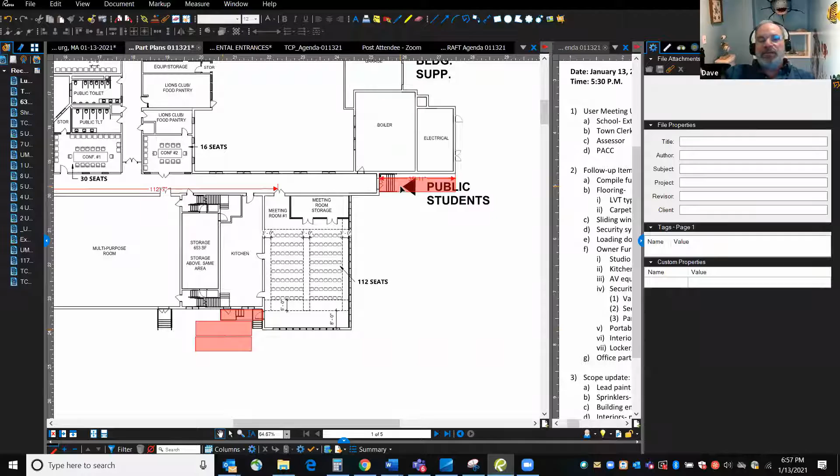And do I want it in the front? Do I want to make it something ridiculous in the front? Or would I rather have it where I can have handicap parking over here and people go in right, if they needed it, and wheelchair access would be all through here.

Well, I guess let's just see what the sketch looks like. I agree, make just a call. I'm just looking at options because of the front, you know, probably makes sense, because in the front there's still going to have to be a handicap ramp. I'm trying to avoid a huge handicap ramp in the front.

Excuse me, but I thought, are we talking about handicap ramp or are we talking about loading dock? Well, I was trying to do it as both. I was trying to have it as a ramp that you could use to load from.

Okay, so you could kill two birds with one stone. You could have a handicap ramp that meets ADA, but you could also use it to wheel up a piece of equipment into the building. Are we losing the existing handicap ramp in the front?

That's my question too. No, no, we would not be losing it. It's just a matter of whether it works and everything else, as a second entrance for things. I would hate to add an extra ramp for additional cost if we already have a ramp that people are going to access, and that's going to be the main entrance that people are using.

Right, Brian, I'm with you. The last thing I want to do is add cost to this. Me too. But having said that, I'm wondering, Tom, are we certain that we don't need a ramp at one of those entrances?

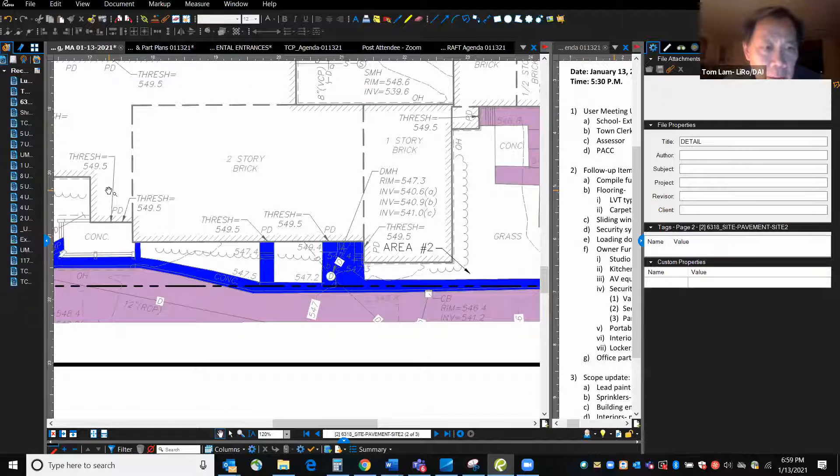Because by code, there's another way to come through, which is the front entrance. So you don't have to have an accessible... well, I mean, I don't know, I'll double check, but I think there's already an accessible path, which is through the front door.

Okay, I think to Matt's point too, is that once you convert this to a ramp, you're still bringing the delivery down to street level, and then you're rolling it up a ramp to get it into the building. Right.

So we can nix doing a study on that. That's pretty straightforward, and I'm okay with nixing the ramp and just going with the handicap ramp and the lift gate if you need it over the stairs. That's fine.

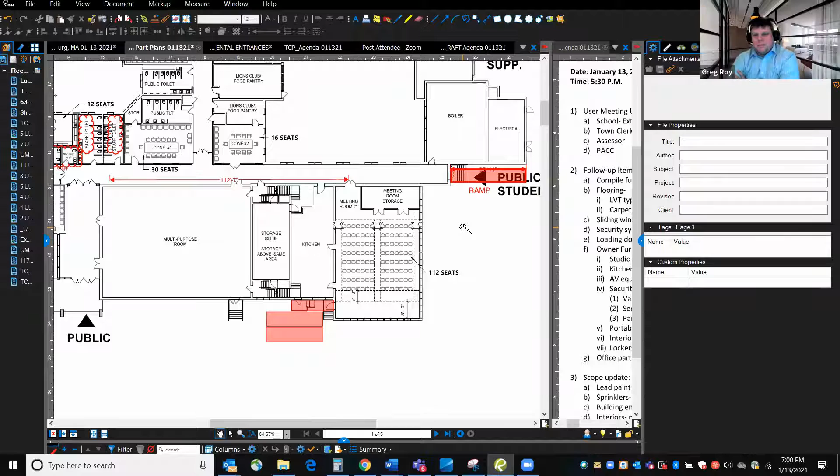All right, well let's see a sketch. I think it's worthwhile to see what it might look like. We'll send it before the next meeting, and I will also double check to see if another ramp is needed from an ADA standpoint.

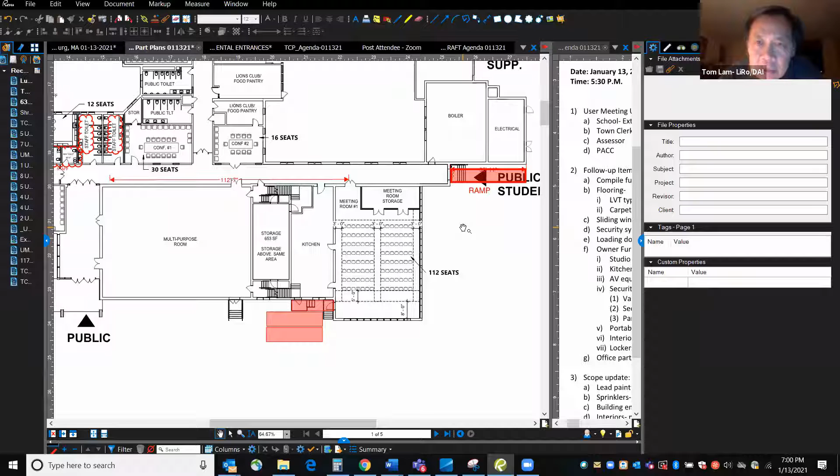All right, so there's another PACC related issue. Parking is needed for one of the new trucks where all the equipment is being stored, so we had a discussion about security for that truck parking in this facility.

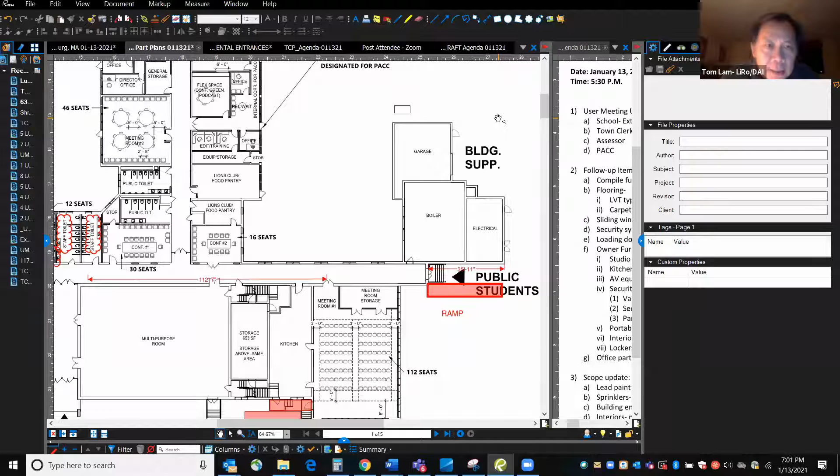I believe the garage is currently used by the facilities department, and I don't know if the committee has any idea or comments regarding security of a van being parked in this area. We can definitely assign a parking spot for PACC, but I think Steve is concerned about the middle of the night somebody might break in and steal the equipment.

Where is that van parked presently? Maybe we don't want to say, never mind. We don't have the van yet, it would be a mobile unit. Permanently installed equipment would need to be both secure and be able to be plugged in to keep everything charged up that's in there. If that garage would allow us to have a space, believe me, we'd be truly grateful.

All right, so I would think let's investigate that, because I think the facilities group should have that. That's what public works and all that is for. So I think we need to just talk to Mr. Londa about that more than anything.

Thanks, Mr. Londa's on the call. John, I'll give you the opportunity to speak to that if you'd like to, or not if you would not like to. Sure, I'll comment on it. So we were looking to retain that for school maintenance.

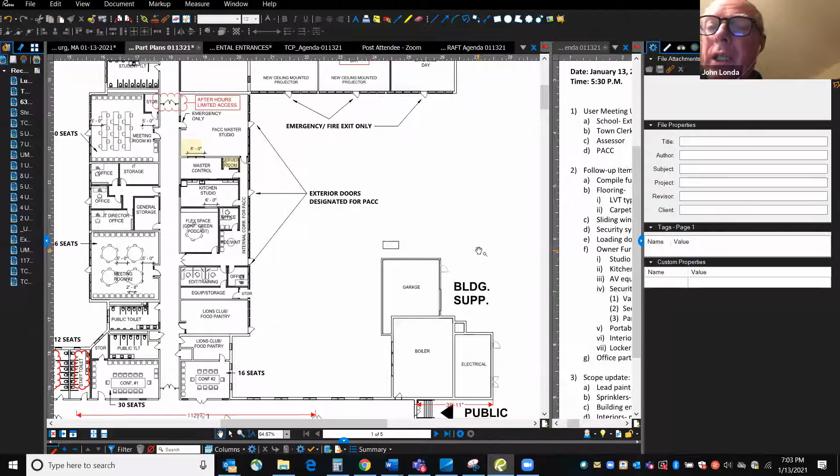Reason being, we have a garage that's over by the Turkey Hill Elementary School. We don't have any place where we can pull a vehicle in, like during a snowstorm, to do work on the vehicle. That's the only heated garage space that we have available, so we were looking to try to retain it.

Is it a single car garage, or how large a garage is it? It's a single car garage, and then there's some workspace off to the side. But it has a single car garage type door? No, but there's no way that two vehicles could fit in there at the same time. No, I don't think so, not without doing a major renovation to it.

And would you be averse to the fact that if you needed to get in there, you'd have the ability to move the PACC van and use it? Not that I want you to lose the garage - I'd like you to be able to have the storage in there and have the equipment you want. But I'm also concerned that if PACC has a van with equipment in it, I'd like to have it in a secure facility.

So we're looking to retain it is what we are, because it's not empty, just waiting for a vehicle to come in. We also have maintenance parts and various things that we need to maintain schools up in that area. It's like a shop.

Probably looks like my garage at home - I can't get a car in there if I tried, all my tools are in the way. I remember that from the tour, that it looks like a garage, and I wouldn't want to have to add more cost to try to renovate it as well.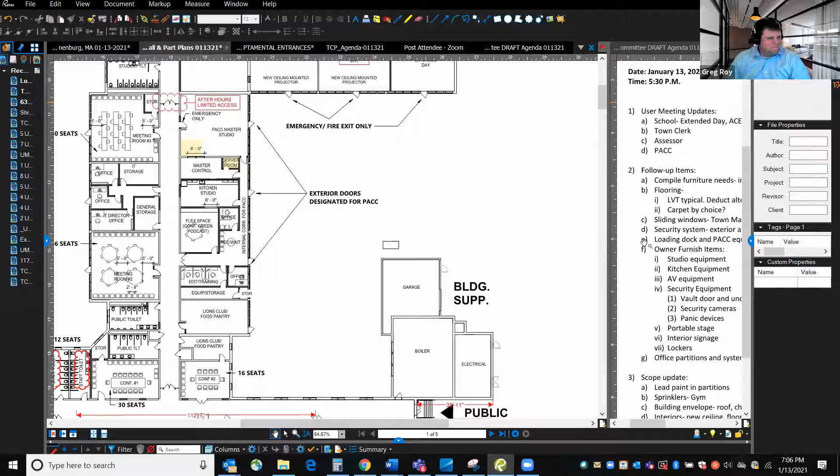Okay, I guess we'll move on. Go ahead, Tom. Great, we finished item 1, so we should be done by 9 o'clock tonight. The other stuff is more updates, and just need some direction from the committee. So I'm just looking at the list right now.

This is really regarding the budget. So we are still in the process of talking to the furniture needs of the different departments. We did ask them if they need new furniture, if they could bring what they have to the TCP, and we will have a list at the end of the day in order to come up with a cost.

Second item is flooring. We did talk about using LVT, typical, and in the office areas we will use VCT as an alternate to see how much savings we can have. Most of the people we talked to prefer the hard floor, but there were a couple of individuals who would prefer carpet. So as a matter of policy, does the committee want to have a standardized finish, and people who really want carpet could bring their own carpet in? So that's a question. Do we want to standardize the finishes or have the different departments, if it's only 2 or 3 individuals, let them use carpet?

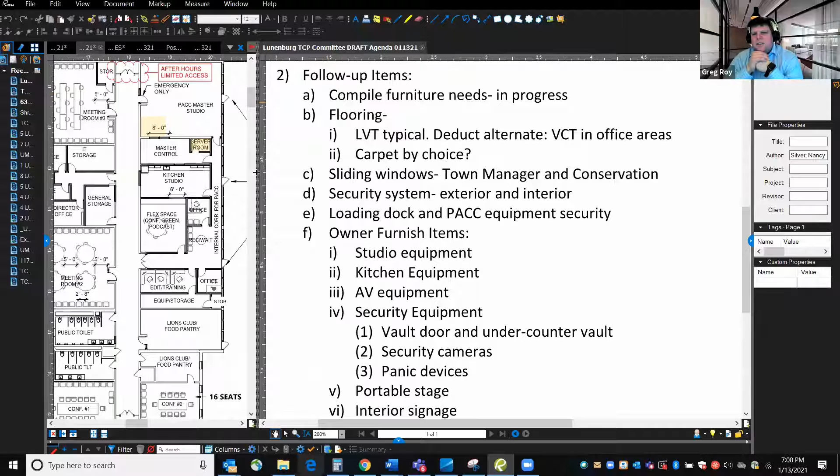I prefer to have standardized because those people might not be working in that department 4 years from now, and carpet is something you have to replace much more often than either LVT or VCT. I would agree. Yeah, I think I do too. Totally agree also. Yeah, they can bring an area rug. They can go get themselves an area rug if they need it. Yeah, it's a matter of cost too, a replacement cost issue for sure. But it's also like we got to clean it. It just seems to be better to have the solid surface and have it uniform so that we don't have to, I don't know.

Mr. Chair, I apologize, but I need to run myself if I could. Okay, that's fine, Dave. So we still have a quorum. It's 4 of us. Excellent. All right, okay. I was worried about that, but okay. No, guys, we're okay. Look forward to seeing you again. Have fun. All right, thanks. Thanks, Dave. All right, bye-bye.

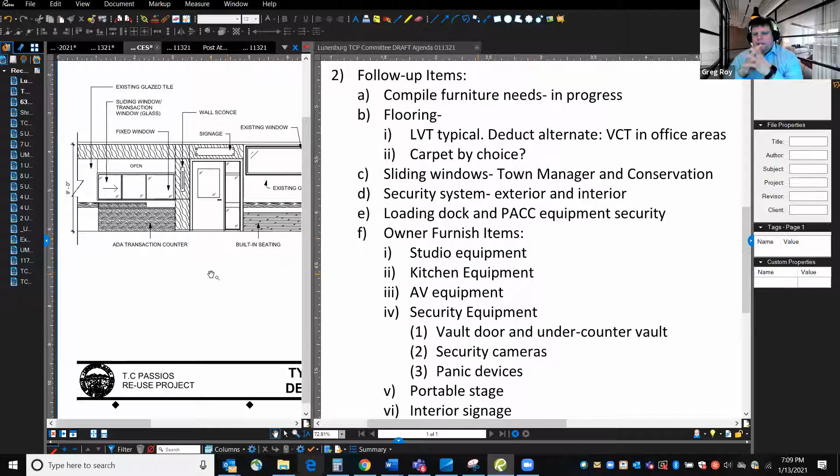Does anybody else have any? Go ahead, Brian. No, sorry, did you have some? Oh, sorry, no. Anybody else? Matt, did you have anything to add on that?

Sure. Can somebody tell me again, LVT and VCT? I think it's vinyl and ceramic, but so luxury vinyl, LVT is luxury vinyl tile, and it is softer when you walk on it, and it's also more durable. VCT, in order to maintain it, you really need to wax it. LVT is a non-wax product, so you save money in maintenance, and LVT lasts longer, but obviously is more expensive.

Okay, so we're typically going with something more expensive but cheaper in the office areas, I guess, right? Or we are going to, as the base, have the same, but we want to see if the budget is a problem, want to see how much savings we got in the office areas, because the corridors are also higher traffic than the office areas. That's true. Okay, that's all I have. Yeah, I mean, I think to me that's a good approach, Tom, I think.

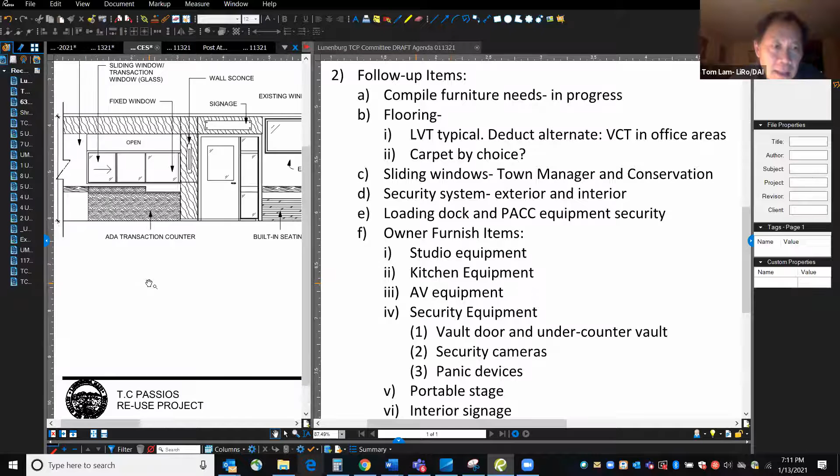Sounds like the committee agrees. Great, so the next question is, again, back to standardization. We talked about sliding windows at the transaction counters. We all agree that there should be, because of COVID, some sort of separation, some sort of a barrier. We also talked about, if they need some sort of transaction with paperwork, or if there are big things like drawings that need to be brought in, they could open the door and get into the office area. But the town manager would really prefer to have a sliding window, same for the conservation group. So what we were thinking is if we might be able to do some sort of, this is a diagram of a standard transaction area on the left-hand side of the screen, so we could somehow have sliding windows on one side and just a fixed panel on the other.

But if there's no need by the department, then we'll just have a piece of plexiglass spanning over this area. The bottom area is still open, so it still works like a bank teller transaction counter. So I think we may be able to accommodate the individual needs without really changing the design that much.

So I know we talked about this last time, and I think we said we should probably just keep with the fixed windows, but I'm kind of thinking, how much do we think it's gonna cost to add the sliding pane? Is this a huge ticket item, or not? I don't think so. I mean, it's obviously a little bit more expensive. It might be, yeah, a few hundred bucks, maybe. But that's what I'm getting at.

It's not like every station needs to be the same, but you'd probably want every station to have a slider, because we're not always going to be in COVID. The natural tendency for most of these places would be to have that open if we weren't in a COVID-19 situation, because it's more inviting. If you walk in and you're talking to someone behind a piece of glass, you feel disconnected a little bit, you know what I mean? It's not like a normal conversation.

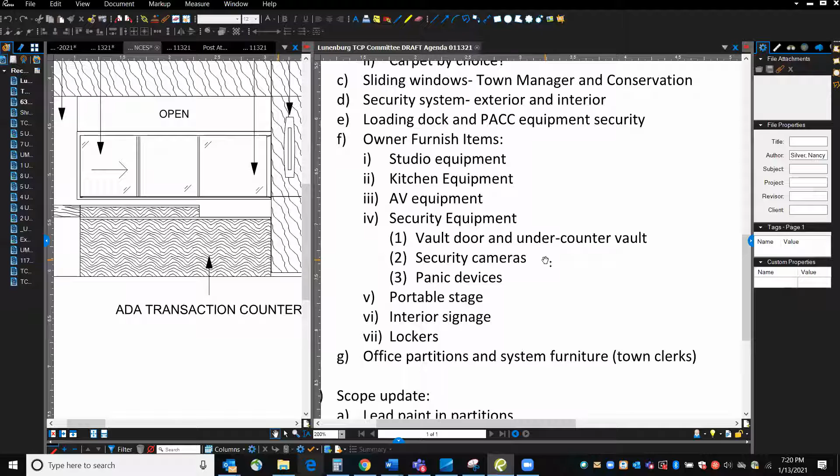So Heather, you're basically saying you don't necessarily want open counters, but you do want the slider - is that correct? Yes. Okay, so let's just see what the price comes in at. Sound good for everybody? Yep. All right, great, thanks.

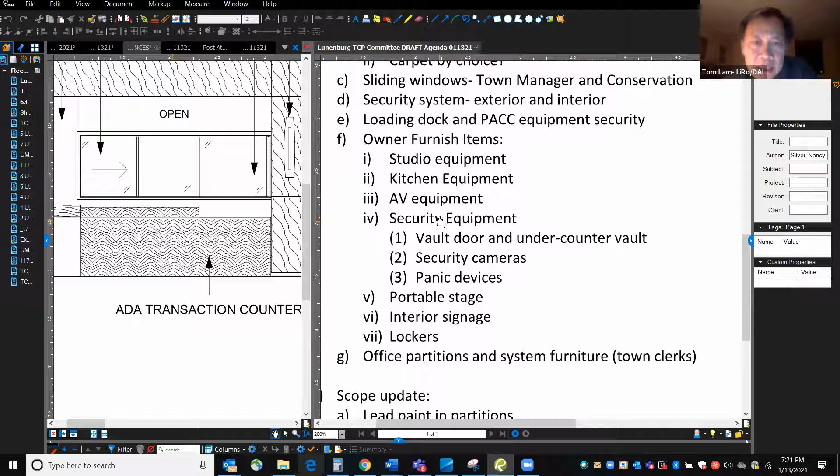So the security system is actually also mentioned under owner furnished items, and we talked about the loading dock already. Earlier Ed mentioned the soft costs, so I just want to go over this list - maybe there's a couple things that should be included.

Steve's group is taking care of the studio equipment, so it's not going to be included in the soft cost. At one point we talked about updating and replacing kitchen equipment, so I want to see if that's going to be off the soft cost, or if we have a survey already done on what is necessary and required, what kind of kitchen equipment we need. This is more for the big kitchen by the cafeteria. Yep, it seems like forever ago that we talked about this.

Okay, what are people's thoughts about this item? On the surface, I think it's going to be a high ticket item, because my understanding is that the really usable equipment was removed from the building and moved to other uses within the school district. So for that to be a functional commercial kitchen, there's going to be a major investment in equipment.

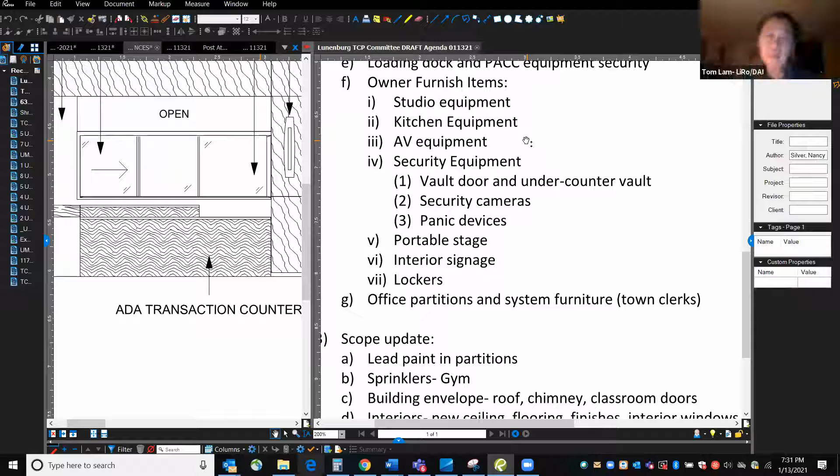Okay, thanks. The next one is AV equipment, specifically for the meeting rooms and the conference room, not for the PACC area per se. Can somebody, so typically it's by the owner, so should it be included in this project? And if so, who can we talk to, to find this number for us?

Well, I'll take a crack at this. I think for the meeting rooms, I think it should be included. I think we need to be able to conduct meetings with cameras in those rooms. So I really feel like in those rooms, it should be included. So I think that—

Is Steve still on the call? No, he left. I think we should talk to PACC about it. But I—

I think particularly in the primary meeting room, there should be—most of these newer meeting rooms now are being outfitted with TVs, for lack of a better word, so you could do a presentation on them. And the ability to plug in a laptop there so someone could give a presentation and project it to the screen big enough so the room can see it. Or a couple TVs so people can see it in the room. TVs nowadays aren't that much money. But I think the 3 meeting rooms, meeting room 1, 2, and 3, should be outfitted with cameras and that kind of equipment. I don't know if anybody else feels the same way.

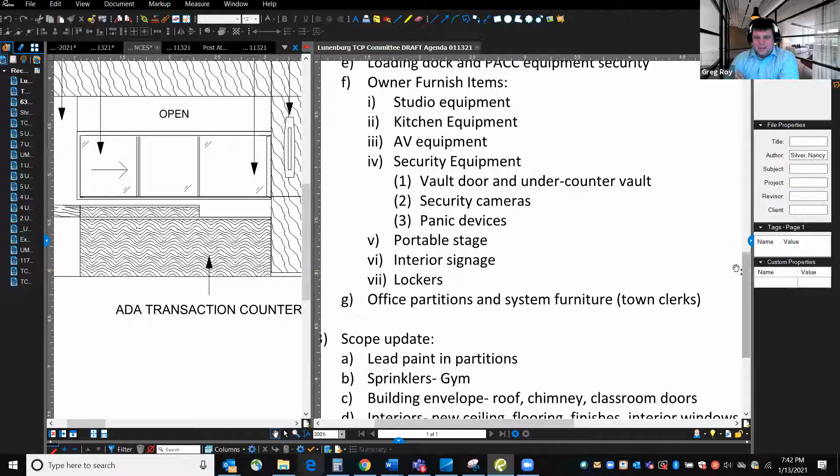I wholeheartedly agree. I think stages, I don't like sitting on them and being a board member that's on a stage, and I don't like presenting to them. I just think there needs to be a nice board table that they sit behind, and that probably needs to be included if we don't have one that we can use, but I think that a stage is...

I can bring a soapbox and a lectern. Exactly, it's just the feel of it is kind of, I don't know. But I think to that point, Tom, I do think we need in that big conference room a spot for, say, 10 people to sit behind, a full board and a couple consultants maybe.

So some type of a modular table system that can be put together in pieces as you need, for say a 5-member board versus a 7-member board. So would it be safe to say that the meeting rooms and the conference rooms should have new tables and chairs?

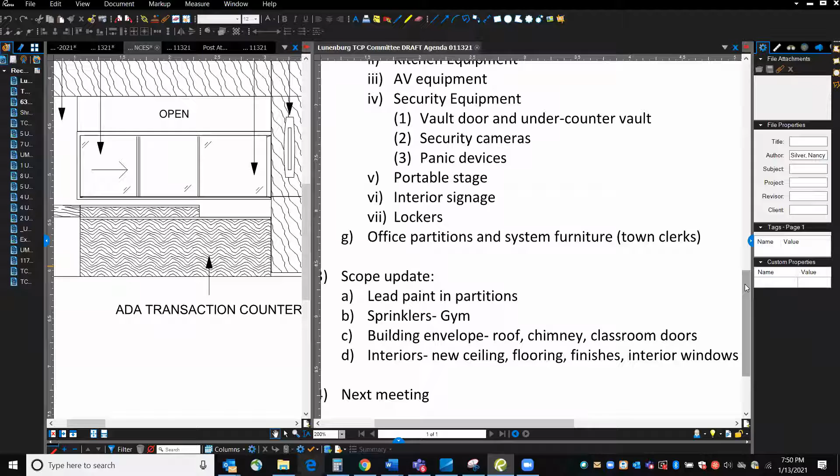Heather, do you have any insight into that? We use typical local vendors, we don't have a consistent vendor that we use. Will you be able to send me a couple of names? I'll get some numbers from them, certainly, like a budget.

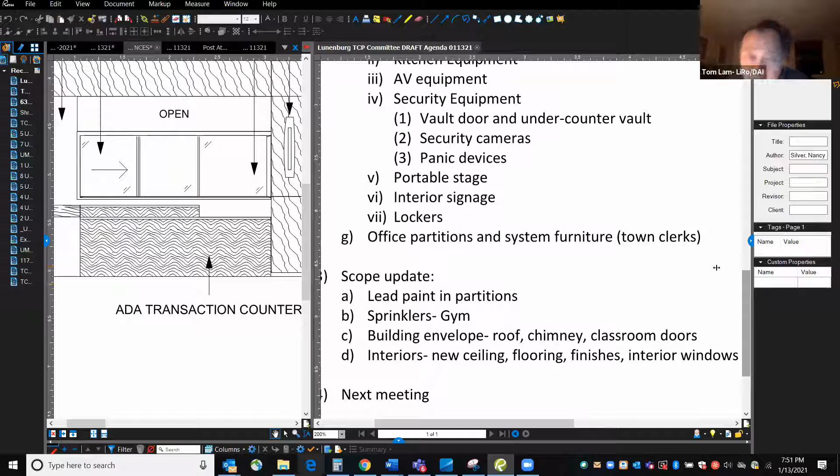Great, thanks. So that's all I have regarding the owner furnished items. I just wanted to give some updates regarding these items.

Last time we talked about lead paint, saying that in areas where there are children we want to remove it. But the other thing that occurred to us is that because of the conditions of the finishes around the building, everything needs to be upgraded. So we are proposing to remove all the lead paint because we are touching a lot of partitions that need to be reconfigured. We may have only a few walls with lead paint that aren't being removed, so we're proposing that lead paint just be completely removed from the building.

I tend to agree with that. We talked about this relative to asbestos too. I don't think it's a great look to put a lot of money into a new building and then have to stand up and say we didn't remove all the hazmat. We should clean the building, otherwise it'll be more expensive in the future. And the issue doesn't go away - even if someday you demolish the building, you still have to do it. So it seems like we should remove it as part of the project.

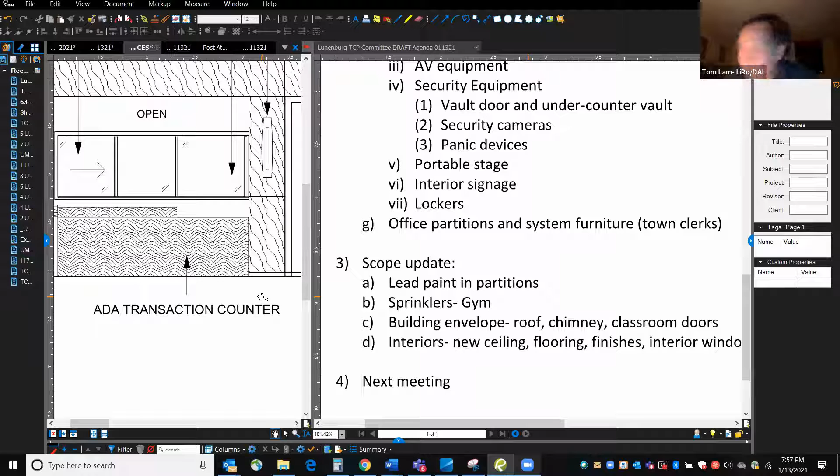So the next thing is, when is the next meeting? Yeah, so I think we decided, we put on the schedule the next one, 2 weeks from today. Which is the 27th. Okay, great. So we'll go for that.

Should we, while we're talking about next meeting, take this up? Every time we do this, I want to put this at the beginning of the meeting next time so that we have everybody here. So given that, let's not set our meeting schedule until February because Dave and Michael Ray aren't here. We can do that at the 27th. Does that sound good? Works for me. All right, thanks, Tom.

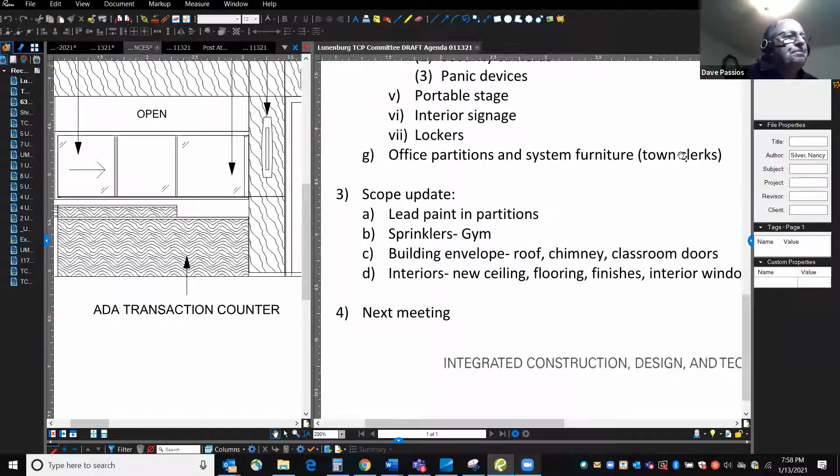Does anybody have any other questions for Tom? I actually have a couple, but I'll open it up to the board just before we move on to the committee. I'll start then. Couple of things.

One thing that I thought of, again, while we were talking about giving you input on when we might get to the midpoint of construction and how long the construction might take. Is there any thought to including costs for temporary space for the people that are occupying the building presently? Or does the committee have any thoughts on this, and might there be any strategies?

Because there's people in there that are going to occupy it afterwards, that are occupying it now, I don't think we're going to be able to do anything about extended day programs. Those might have to be in a school building, but do we need to provide temporary office space for the superintendent's office and that kind of thing? Now, my understanding, this was going to be a phased project, so if that is the case, the superintendent would not be impacted until their new spaces, I'm assuming their new space is already complete. I don't know how the phasing would work, and I don't know if that scenario's been run through yet.